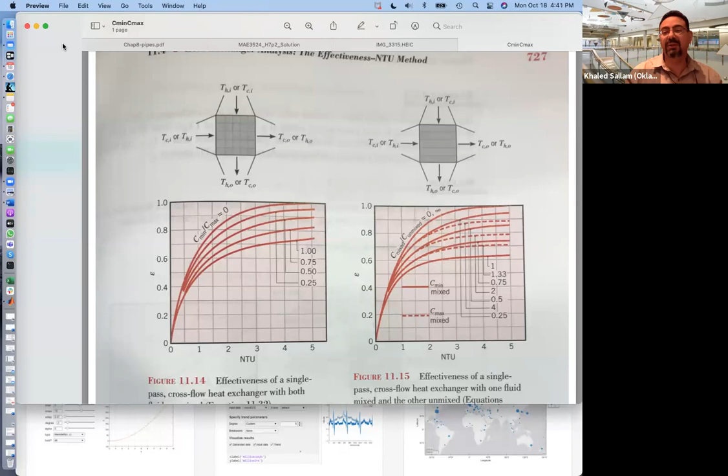All right. So now remember this last week.

Does anyone remember this graph? Yes. So what is this graph? Cross flow, like a radiator, right? Fluid is going this way in the pipes and the air is going normal to it. And I was confused last week about which one is the black solid line and which one is the dotted. Here in this one, there's no confusion because both fluids are this one in that cartoon.

Both fluids are unmixed. Both fluids go into pipes, baffles. They are not going as a bulk. It's not a stampede of fluid: let's all go, guys, get heated. No, everyone going into his own lane. Okay, but in this cartoon, they wanted to say that one fluid is unmixed, going into pipes, going into baffles, while the other fluid is just like, let's go. Everyone go in this big duct together.

And I was confused which line belonged to which. I told you we need to find a better chart where they actually have the key. This is the better chart which has the key. So what is the key? The solid one belongs to C minimum is the mixed, and the dotted one is C max is the mixed. Okay.

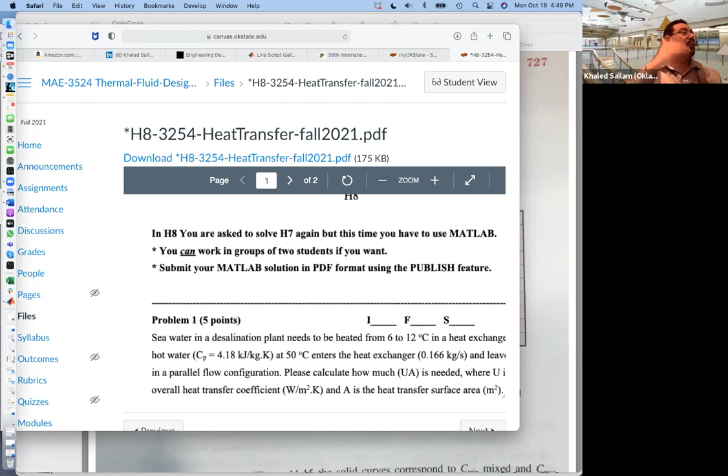And even if you think you know it all and you are the best student in this class, you still benefit from explaining what you think to other people. There's another level of knowledge you get when you try to communicate downwards, right? Because the other person will ask you a question and you need to reiterate your thoughts, like, yeah, why is that? And so again, I would strongly encourage you, but I'm not going to force you. So people online, you can also chat and try to prepare yourselves with each other, right?

And so how are we going to do this in MATLAB? So same 2 problems exactly, right? And in the second problem, he asked us to use the effectiveness method. So fortunately, the MATLAB file that's available for us actually uses the effectiveness method. So there are those 2 guys, and we're gonna talk about them. And here is a homework from 2 years ago that actually specifically uses this. So that would be a really good example for us.

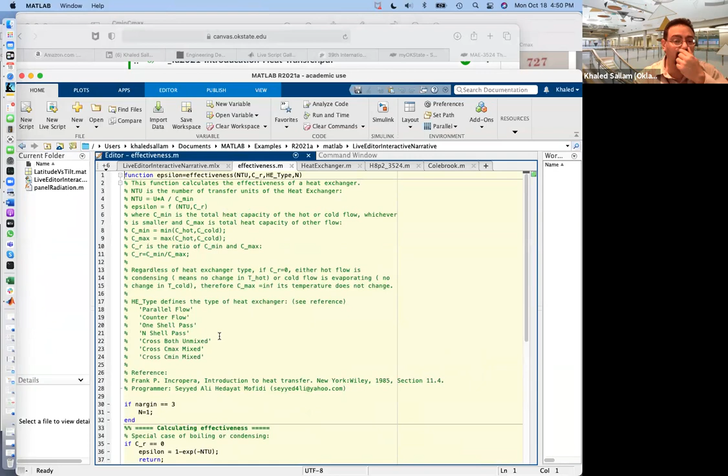So here is the homework. This is homework 8 2 years ago, not our homework this week. And here is a solution for it. So what are those two files? There is this effectiveness thing here. Let me open it. It's too small, I guess, to see. But basically, I got this from File Exchange on the MATLAB webpage, right? You know, on the MATLAB site, there's a lot of code available.

Who has been to File Exchange? All right, only one person? It's really a very cool place. All you need is a MATLAB account, which I think is free. So if I just say MATLAB Exchange, you can look for application and discipline. You can go to engineering, and under engineering, you'll probably find XSteam and stuff, and you can search for things. Modeling of Rankine cycle using XSteam. Here's XSteam, thermodynamic properties of water and steam. Anyway,

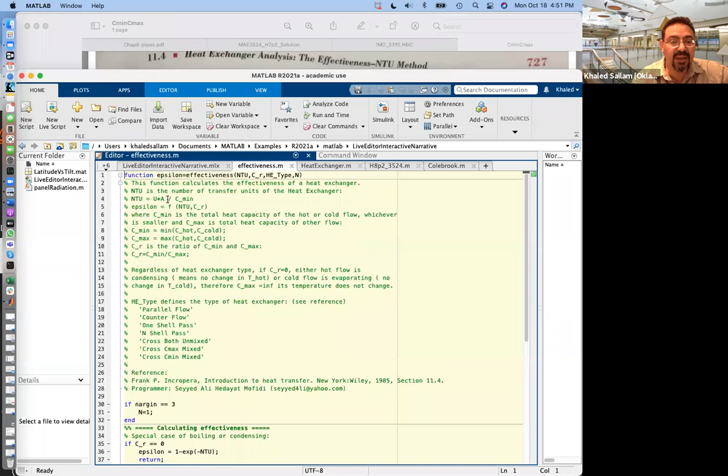I was talking about what is this? So this code, effectiveness, if you read it, says number of transfer units, UA over Cmin, and basically you go in with the number of transfer units and the CR and the heat exchanger type and the number of passes. Did you tell me parallel flow? And then it calculates what? The effectiveness, epsilon. It just calculates epsilon.

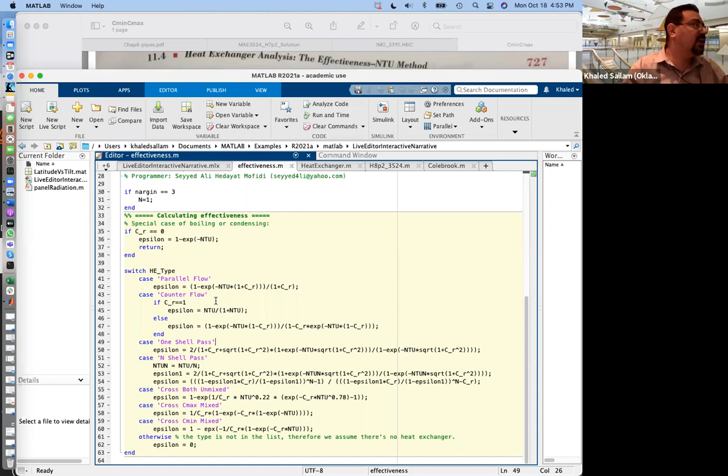So that function is basically the table of equations that we saw in the lecture notes. Remember, for each case, there is an equation between epsilon, the effectiveness, and NTU, number of transfer units, which is UA over Cmin, and the ratio, C minimum over C max, right? They call it CR. Remember the joke last week, how everything is C, from cp to capital C to the ratio CR. So this just calculates the effectiveness for you.

The heat exchanger one is set up such that when you call this, what do we need from the effectiveness method? Why do we use the effectiveness method? Because we don't know all the temperatures, and we really want to know the 2 exit temperatures. So we call the effectiveness method if we know the area and U, and the heat exchanger type.

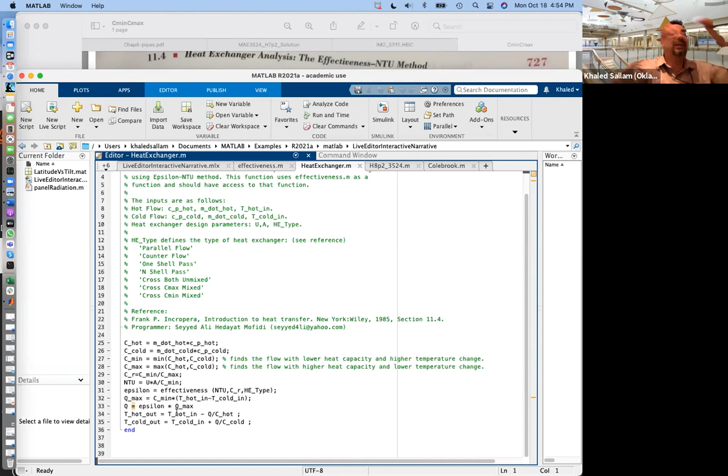We have a heat exchanger, and we are telling it we've got this hot fluid coming in, cold fluid coming in, and we want to know the results. How cold will the hot fluid be at the exit, and how hot will the cold fluid be at the exit? Basically, we need to figure out those two. So that's what this heat exchanger module will do.

At the end of the day, he calculates this: T hot out and T cold out. And how does he do this? That's easy. He basically looks for Cmin. He compares the two C's that you give him, the C hot and the C cold, and says which one is C minimum. Once he does this, he also calculates the ratio and the number of transfer units, UA over Cmin. And then he goes and calls the effectiveness module.

So you need those two, heat exchanger and the effectiveness method. He calculates the epsilon, and once he calculates the epsilon, he says, here's my Qmax, which is C minimum times the maximum delta T. What's the maximum delta T? T hot in minus T cold in, right? That's the maximum temperature difference. Multiplied by C minimum, this is the maximum Q you can ever imagine to transfer between the two.

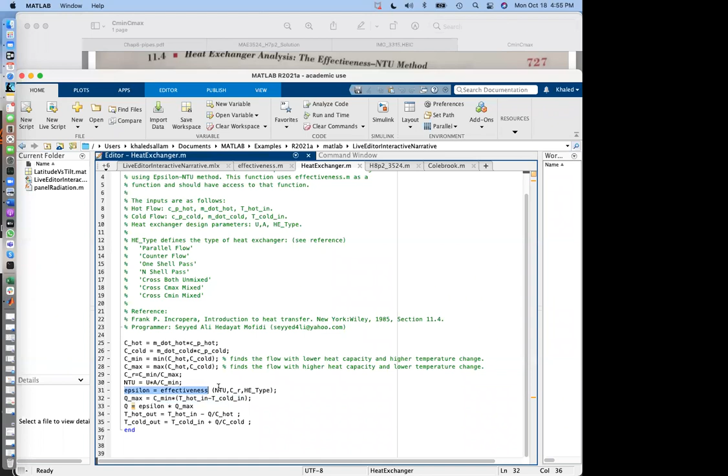Is that epsilon from the other file? Is that why we need both? So the epsilon in this file is from the effectiveness. So you need both. The effectiveness is basically working as a slave under the heat exchanger master function. So you definitely need the two functions sitting in the place where you're solving the problem. All right, that's what I was wondering. Right, they cannot work without each other.

Basically, the effectiveness is really where the calculation is done for the formula, and the heat exchanger function is the one that sets up the equation so that we can use effectiveness. Setting it up means give me my number of transfer units and tell me which one is minimum, so I can go ahead and use the formula. And so he calculates the Q actual from epsilon times Q max. Once I have my Q actual, I can calculate T hot out and T cold out.

So that is the appropriate way to use the effectiveness method. You use it when you have the area, the U, the M dot, and you're just wondering how hot the cold fluid will leave and how cold the hot fluid will leave. Now, not every problem is done that way. Some problems actually ask you for the area. Like our homework. Did it ask for the outlet temperatures, or for the area? It asked for the area.

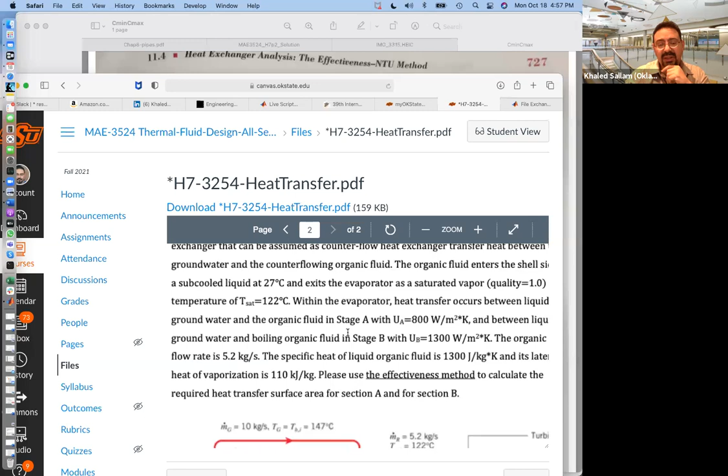So how could I solve it with the effectiveness method when it actually cannot start? This one is asking to calculate the required area. So how can I solve this where I don't have the area? In order for the method to start, you need to give me the area, but in this problem you're supposed to calculate it. So what happens then? And he said, use the effectiveness method. So what do I do? Calculate the exit temperatures for each side, and then you can use the effectiveness method.

Say that again slowly. If you calculate the exit temperatures... But I cannot calculate the exit temperature because I don't know the area. There is no area given here. And actually the temperature is given here. See how the cold fluid is coming in at 27 and leaving at 122? And the hot fluid is coming in at 147, but I can know its exit temperature, right? How? Q equals Q, and Q is M dot Cp delta T on each side. So I can calculate the temperature.

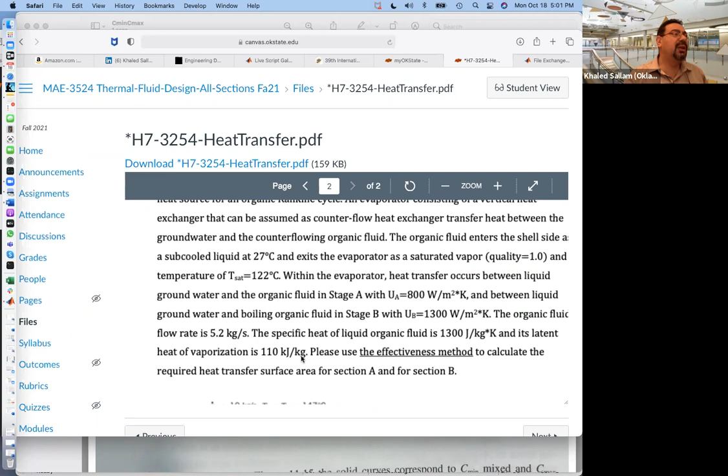So the question for people online is: that latent heat of vaporization, that 110 kilojoule per kilogram, is that my Q dot? See, there's two parts: one part without bubbles, just cold fluid becoming saturated, and then the second part is the saturated fluid bubbling until it becomes all vapor. And maybe even superheated, but it isn't, because he said X is 1, right? So the question is, can we think of this as Q dot?

And my question for you is, what is the unit of Q dot? Joule per second. This guy is joule per kilogram. To turn joule per kilogram to joule per second, I need kilogram per second. So you should think of this as Q dot per M dot. This is a small q, specific heat addition. So it's just waiting for M dot. So if you multiply this with that M dot, the 5.2, you got yourself your Q dot over here.

Yes? And if we have the Q dot that the cold fluid, not the water, the working fluid, the organic fluid takes to heat, this is also the Q dot this guy will take to cool. And what this allows you to get is the delta T here. You will be able to find this temperature in this part. And so now this is a separate heat exchanger. One fluid is constant temperature, the other is going from 147 down to whatever temperature you just calculated.

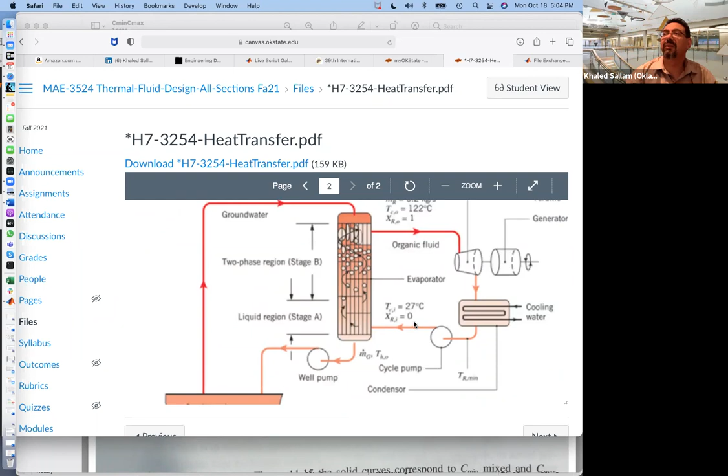Now in the second part, this is counterflow. The cold is going from 27 to T saturation, and the hot is going from that temperature all the way down to whatever it takes to go down. Yes?

Okay. By the way, what does organic fluid mean? It's not steam. They're those weird fluids at cold temperature ranges like this, not like 1000 and stuff. Because the vapor dome is really nice, and it allows you to have a dry turbine. What's a dry turbine? X is more than 1 at the exit. Dry turbine even without a superheater.

So remember how in one of the previous projects, when we took the pressure up, we ended up with a very wet turbine, and one of the requirements was to find out what's the minimum X that you allow in your turbine before all those droplets at the end of the turbine, before you go to the condenser, become really destructive.

If the quality of this guy is low, 0.7 and 0.6, you'll be shooting droplets tuck, tuck, tuck on the plates of the turbine, and that will destroy the turbine, right? So those organic fluids with this small temperature range will be dry because of the way their dome is sitting, basically. Okay. Anyway.

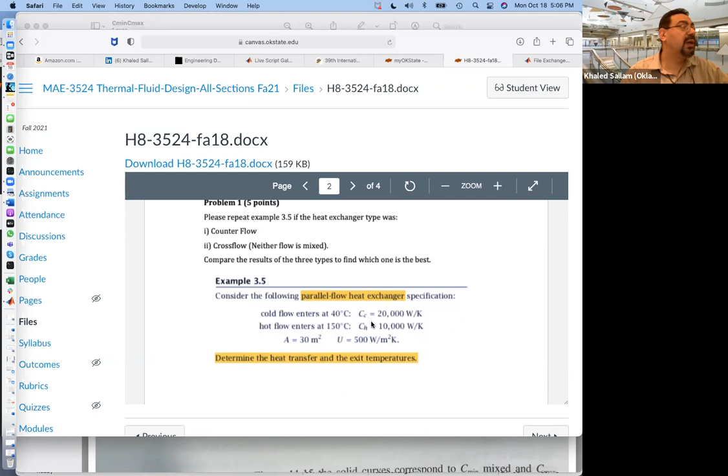Okay, so this problem is perfect for the effectiveness method. Why? Because I got the U, I got the area, I got the heat exchanger, and I have the temperatures in and the temperatures in. Okay, and this capital C, what is this capital C?

That's the m dot Cp, and I could tell because of the units also. Even if someone gives it to you in small font and you're like, is that specific heat or the heat capacity? The unit will give it to you because it's watt per Kelvin. Remember, Q is m dot Cp delta T. So Q dot over delta T is m dot Cp. So m dot Cp must be watt over Kelvin. So when it's watt over Kelvin, that's basically m dot Cp.

So that would be perfect for that program, right? And so those are the results. You can practice with that code, and you should produce basically those numbers. TC out, cold, I think I made a mistake. It should say T hot, sorry, no mistake. It's T hot out and TC out. And C stands for degree centigrade. So you see for parallel, counter, cross flow, and the Q in each case.

And not surprisingly, which one is the best out of those three? Counterflow. Look at the counter, it has 760 compared to 730 compared to 650. That's what you do when you do parallel flow. It's horrible. You're shooting yourself in the foot, basically. Because you put the two fluids against each other and they limit each other's potential to go down and go up. So you are submerging your own fluids by sending them into parallel flow.

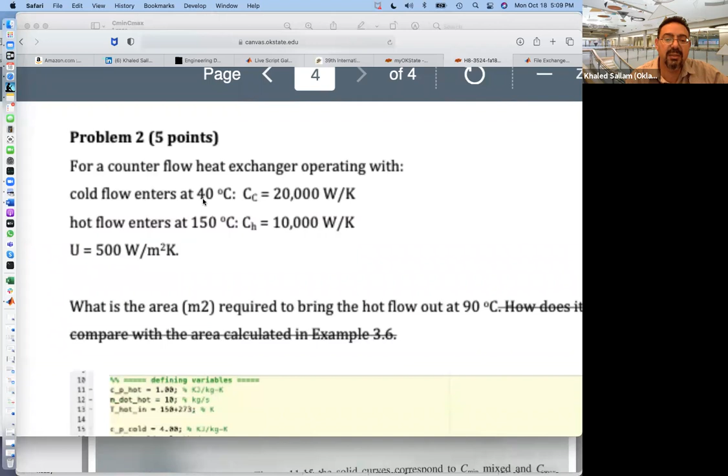Okay. Now the second problem: for a counterflow heat exchanger operating with this temperature and these C's, what is the area in m squared required to bring the hot fluid to 90 degrees? So that is the one problem, similar to our homework, where he's asking for the area. And the heat exchanger function is not set to calculate area. It's set to calculate temperature out. So you assume the area, calculate the temperature, ask yourself, is that the right one or no? And then you go back and forth. And so those are the answers.

And the code that does all this, one example here, homework 8.2.m. If we open it here, you will see how it is working. So I'm feeding him what he wants: Cp hot, m dot hot, T hot in, Cp cold, m dot cold, T cold in, and the U and the area. And this is the part that will be the assumption. You assume this until it gets you the right temperature. And this is a call for the heat exchanger function. What is the number for m dot hot? It's basically this guy. So rather than writing this, we could have entered 10.

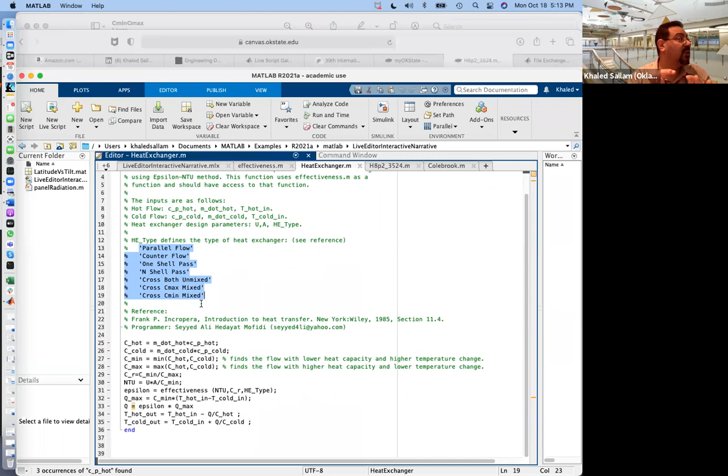So I just want to show you how, in this example, he is calling the heat exchanger. You need to give him those things in order: Cp hot, m dot hot, and you know that order from this example, or if you go to the function, the names are very clear. And the last one, HE type. He is telling you this is exactly the call. You cannot change the format. You have to stick to exactly that wording. See counterflow over here in purple? If it's capital C, you have to make capital C. Capital F, you have to make capital F.

Right. So I know you can call a function in MATLAB. That's not really that hard. But for those who have been hesitant to use MATLAB, you need to take that step. I and the TAs would be very happy to help you if you are still having problems. But I really wish that everyone leaves this course with the ability to easily use a MATLAB code that we can get from File Exchange at least. You don't have to be a good programmer until you get to your 3403, right?

3403 computer methods. That's when you'll really become good. But at least for now, what you need to be able to do is, if someone gives you a MATLAB file, you can run it. And by run it, you just need to know where the input numbers are, and how you can set everything under one directory, keep all the functions, and basically let them call each other. Like this example is going to call heat exchanger, and heat exchanger is calling effectiveness.

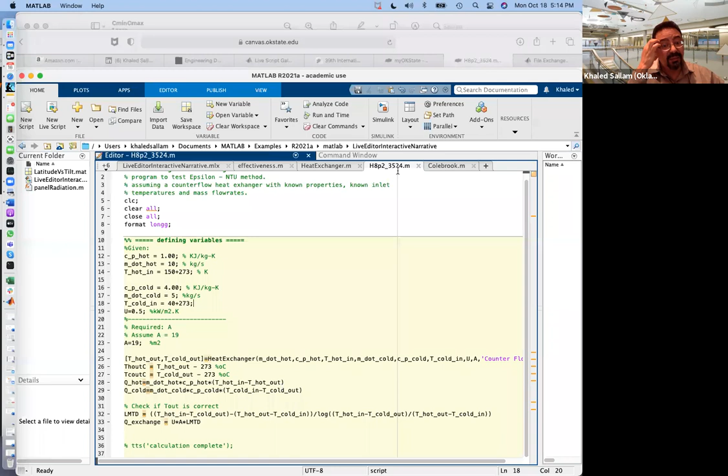Okay. So when you make that call, what will come out? This will come out. The other side is what will come out, just like what we did with XSteam and what we did with the psychrometric chart. And those two numbers now, he is first turning them into degree C, and then he is calculating Q hot and Q cold. All right? Yeah.

So the reason why we are assuming the area is because that heat exchanger code will not run without an area. He requires the area and the U as an input, and he produces the temperature as an output. So in order to use it, we really have to work in his own language. Can I solve the problem using the effectiveness method without this assumption? Well, if we have the chart, we can. How do we do that?

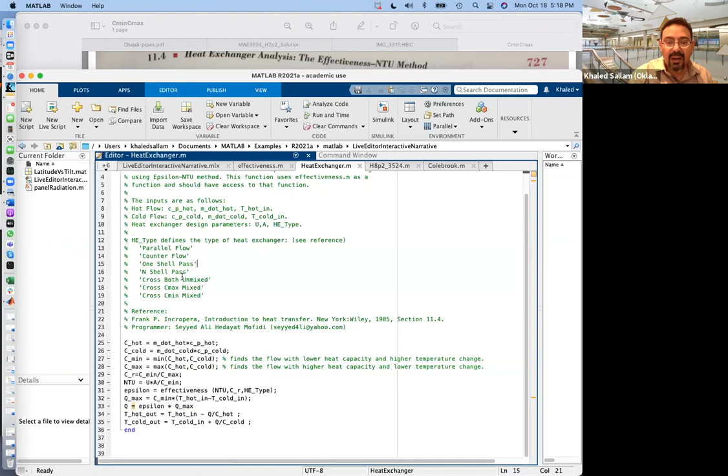I found that code but couldn't get it to work due to the type error. Yes, so the type error, again, if I were you, first of all, I would let this code run. This example one, make it run first, and it should run. And then after that, you just modify this by copying it. You just copy and paste. You don't even type. Control C, put it here, and it will work. Right?

Here's a funny and sad story about MATLAB. The first time I used MATLAB, for maybe 2 weeks I couldn't make the program run. And it turned out it was the file name. I like to put a dash and a version, or a dash and the date, in my file name, so I know when it was written. And it turned out MATLAB doesn't accept dashes in the file name. It has to be underscore. For 2 weeks I'm like, what's going on? So it's really very picky when it comes to names and formatting.

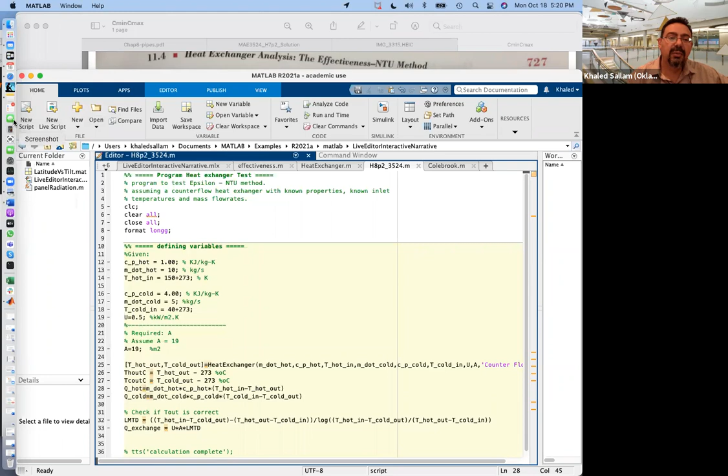All right. So, does this make sense? Yes. So you guys can run this file just to make sure it works. And then for homework 8, you will do homework 7 again, and homework 7 is basically 2 problems, right? You'll be able to do this, and that will be easy, hopefully. Questions?

All right. Let me tell you that to prepare for the midterm, there are all those problems. How many problems are in here in chapter 3 of that book? Let's go till the end. How many? 44? 44 problems, right? So these are 44 solved problems that you can practice on. All right?

The book and its solution is basically here. Download the heat transfer book and solve the exam. Okay, those are the 2 links. So download this and don't look at the solution immediately. Try to solve the problem. Give yourself a chance to get in pain a little bit, like 5 minutes of pain before you jump to the solution. Force yourself, like, no, I need to get it myself. All right? Good.

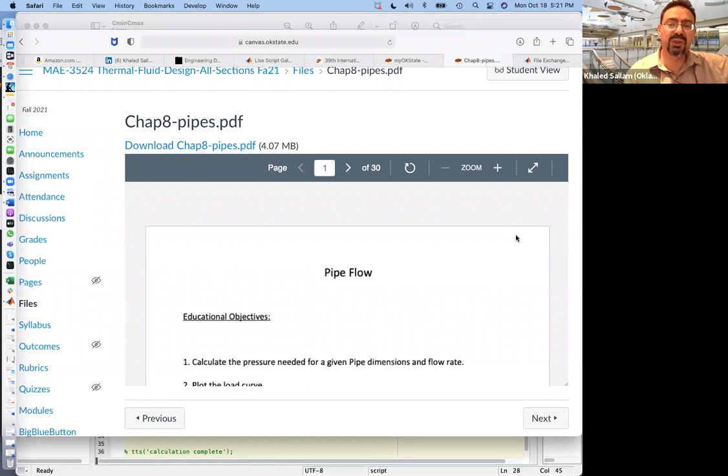Right. So the next part of the course is the fluid part. And here is what I'm hoping we can achieve from this part: calculate the pressure needed for a given pipe dimension and flow rate.

I'm sorry, sir. So on the exam, did you say it's November 1st or a week from today? So the exam is not next week. The exam is November 1st. Okay. So we have one more class and then the exam. And it should be under the syllabus, right? Okay, I was just making sure. Thank you. Yeah, we didn't change the date. Whatever is on the syllabus still works. Which is next week? No. 2 weeks from today.

Really? Let me double check. Here is my syllabus. No, that's not my syllabus. This is my syllabus. It says exam 2 is November 1st, and today is October 18, sorry. So you have one more class next week, and then the exam. Yes?

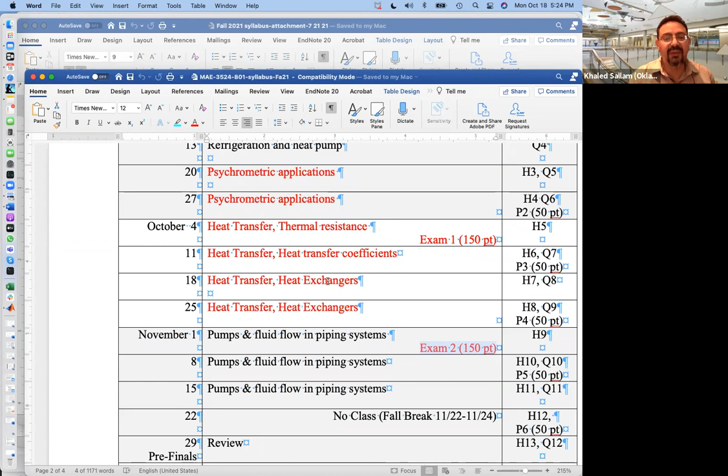It's over the stuff in red. So it's the psychrometric application, all the psychrometric charts, right? What's the temperature of the supply air, what's the temperature of the air leaving the cooling coil, latent load and sensible load, all the stuff about the psychrometric chart and HVAC, and then the heat transfer. All right?

Again, so the question is, are you going to post the solution for the second midterm? Yes. And when are you going to post it? I'm going to post it just the Sunday before that. Why? Because I just don't want you to read it. There are so many solutions everywhere, but I just want you to really experience the time crunch, because that is really a problem, like how quickly you should solve the problems. Can you do it if you promise to solve it on Friday? You promise? Okay, then I'll post it on Saturday. All right.

So now in this last part of the course, our goal is to be able to calculate pressure drop in a pipe. If you have this flow rate and you want to deliver it from Stillwater to Tulsa, a water pipeline or natural gas pipeline, and they ask you how large is the compressor that drives this natural gas, or how large is this pump, you should be able to calculate the pressure drop. You should be able to plot something called the load curve.

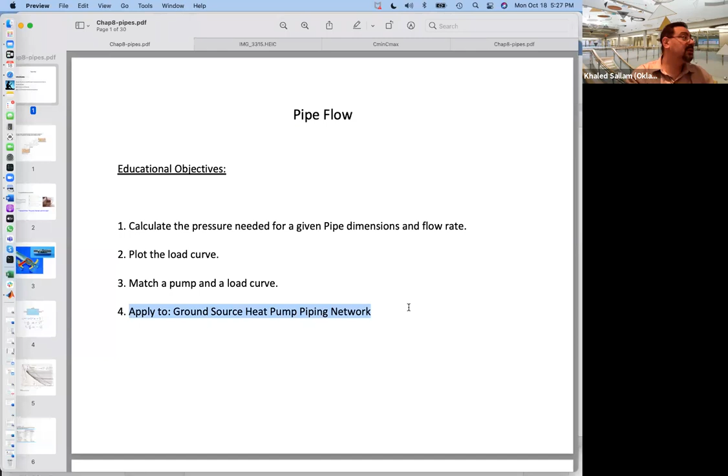It's a network of pipes that go into the ground, because the ground is more favorable for heat transfer than the air, because it's warmer in the winter and it's colder in the summer. So who wouldn't need that, right? That's pretty good. That helps our heat pump to have a smaller delta T on it, which makes the COP go higher. Okay, so that is the plan.

And you know, this part, you probably have seen it in which course, how to calculate the pressure? Fluid mechanics. You probably have seen it and you probably remember it too, so it will be a good review, right? It's not going to be that hard. So how much horsepower does the pump need to deliver the Q from one place to the other? Sometimes they ask for the horsepower, sometimes they basically say what is the head of the pump. And the head is usually in feet of water.

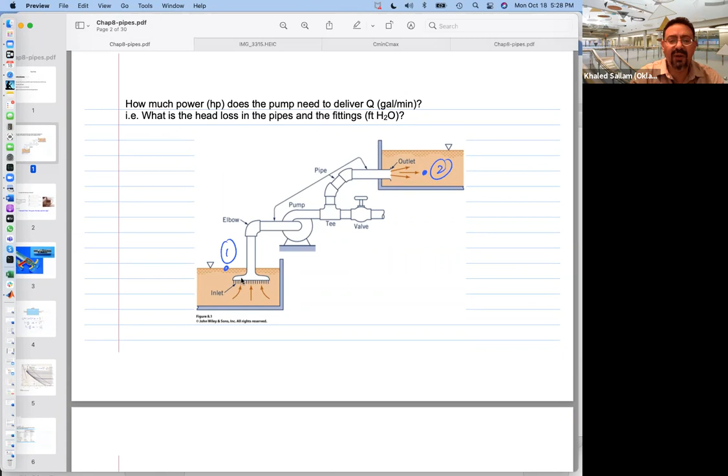So why does the pump have to work to deliver that? Because every one of those things has pressure drop over it. The inlet with all those strainers has pressure drop. The elbow has pressure drop. The tee has pressure drop. And of course, straight pipe has pressure drop. And that flow rate, that kinetic energy here, is energy that the pump needs to work for, right?

And you would think maybe that kinetic energy is useful. No, it's not, because all that kinetic energy, what will happen to it in the tank? It will dissipate and become heat. All that exit flow rate is total loss. You wish you would just slowly push it, because if you are sending it at a very large V squared over 2, big kinetic energy, you are paying for it.

Okay. So the losses in these pipes and the elbows and the valve, the major loss, which is straight pipe, and the minor loss, they all basically depend on: is the flow laminar or is the flow turbulent? Okay. And the guy who first came up with this experiment was Reynolds. And the experiment was like this, pipes with a dye.

And in the spring, hopefully we'll offer experimental fluids 4273. We do this experiment where we have a big channel, and we put the dye, food color, in the pipe, and you can really see when the flow is small, the dye just leaves nicely. But if you increase the velocity, or increase the diameter, or decrease the viscosity, use a very light viscous fluid, you will actually see the dye doing this. The reason is that the flow is unstable. Any small fluctuation gets amplified and you see the dye basically spread.

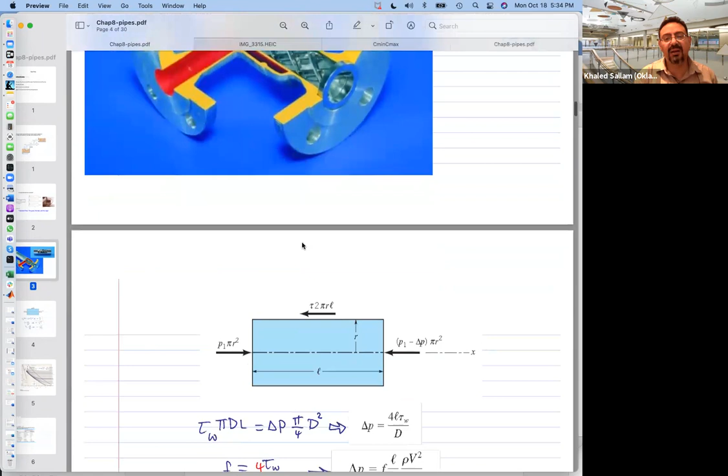So the point behind this is that you shouldn't always think in your design, let's make it laminar so that we wouldn't pay the pressure drop. No, you want to pay the pressure drop if there's another objective in your head, right? So you may be willing to actually have extra turbulence. So the pressure drop can be calculated like this or like this. And I really think this equation here is probably the most important thing that you need to have in your head from fluid mechanics before you leave college.

Just like in heat transfer, the one equation you need to remember from the heat transfer course is what? Q dot is UA delta T, and delta T is the logarithmic mean temperature difference. That is the equation of heat transfer. I would say in fluid mechanics, at least at the undergraduate level, that is the equation to remember: the pressure drop in a pipe is f L over D, half rho V squared. Half rho V squared is called, what's the name for it? It's called dynamic, so close. It's called dynamic pressure, but it's not head yet.

When you turn it like this, what happened here? He just divided the pressure drop in a pipe over rho g. So the head loss is the frictional pressure drop divided by rho g. So when you divide this over rho g, the rho disappears and the g shows up. So now this is exactly this, except for the unit. What's the unit of this guy? Pressure. It has to be pressure. Delta P is this. This is Pascal.

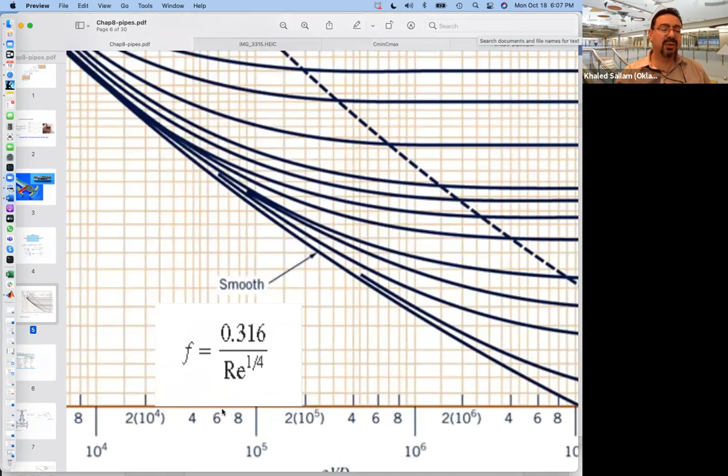This particular curve, the last one, is for a smooth pipe. So PVC pipe, glass pipe, things that are super smooth, we just use this formula, right? 0.316 over Reynolds to the power 1/4, and this formula is called the Blasius formula.

So in my graduate course, I teach multi-phase flow this semester for graduate students. So we also calculate pressure drop, but guess what pressure drop they are calculating? They are calculating it for bubbly flow, for example, or slug flow. So they calculate it for two-phase flow, which makes it a little bit more complicated. So the pipe is not just water, but it's crude oil and natural gas together. What's the pressure drop? But in our undergraduate course over here, let's stick to single phase flow, right? Just one fluid going into the pipe.

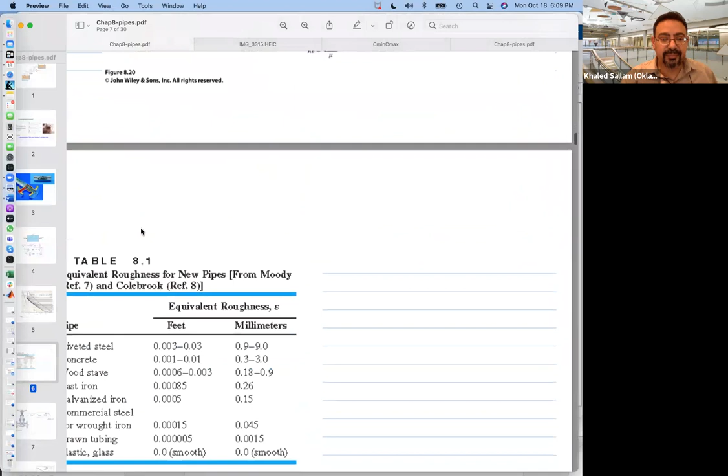And this is the table for the epsilon in feet and in millimeters, depending on the material and the manufacturing technique, because even if it's the same material, the way that you made the material can make the roughness different. Okay. You can see how the plastic or glass epsilon is basically 0. So that is the lowest curve, the smoothest curve at the end. And that's why this formula does not have epsilon over D. It's just a function of the Reynolds number, because the epsilon over D is 0, right?

Okay, so this is what we're gonna do for a big long pipe. F L over D, V squared over 2g, and we get the F from this chart. Now, what about all those valves and elbows and bends? We call those minor losses, because compared to the long pipe, the major loss will be 10 meters, and then you have 1 meter of minor loss, for example. But in some networks, the minor loss could really not be minor anymore. It could actually be more than the major loss.

Think about sprinklers. Look at all those sprinklers on top of our heads, and now imagine how many elbows they have compared to the straight pipe. And the pressure drop in the sprinkler itself. So in that network, the minor loss could be really significant compared to the major loss.

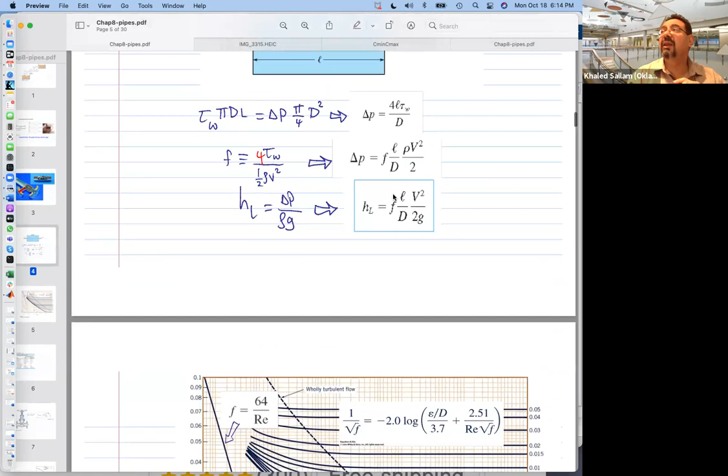So that K can be a really powerful tool, right? And sometimes for those fittings, rather than giving you K, they give you what? They give you lengths. So they will tell you that valve, being half open or quarter open or 3/4 open, will be as if you extended the pipe coming toward it by 2 meters, for example. That is its equivalent length.

And if that is the case, you just tell yourself, my pipe is 10 meters. Let's add 1 or 2 more meters because of that valve, and 1 more meter because of the elbow. So all the fittings can be either a K or an equivalent length, and you just add them to the pipe, treat them as a pipe, and say, here's my f for all those pipes, the original pipe and the extension, all right?

And in this part, I'm saying which V, because sometimes you are wondering which V. Is it V inlet or V outlet? If he gave me K for that sudden contraction, K equal 0.7 or 2, should I multiply by V1 or V2? The velocity before or the velocity after? Which one? The answer is follow the recipe.

The table that this K came from will tell you. This is not about guessing. It's not about physics. This is about the way they made this chart. So if you're going to use their K value, you better use the recipe, right? You could find another chart that's based on the other V, and it's totally correct. But of course, the K number will be different because it's based on a different velocity.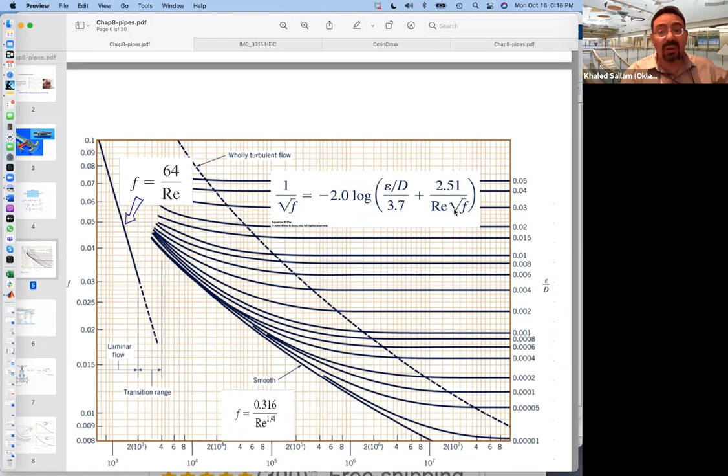Charlie said, when we were asking why the Reynolds number wouldn't matter, that when this goes to infinity, it will drop out. See, this is also a way for you to check if this formula is correct. You can see what happens at the extreme case. The Reynolds number becomes so big that term goes to 0, and f will just be a function of epsilon over D, which is actually happening. Right? So then, yes, this formula is correct.

So you can learn a lot by just taking everything to the extreme case, kind of like best case scenario and worst case scenario, and see if it makes sense or not. Okay. For example, look at here. This is the sudden expansion. Again, it's a function of velocity. Which one? Listen to the recipe. So here he is using V1, then we use V1. Here he used V2. Let's use V2. Right?

So I could understand easily why if you have sudden contraction, you have a pressure drop. Because, I mean, you are annoying me, you're giving me smaller area. Yeah, I'm gonna drop my pressure. It goes through this tiny hole. But why does going to sudden expansion also have a pressure drop? Why is that? You're giving me a break. You're moving me from a small house to a big house, and still I will feel annoyed and I have to pay out of my pump. Can you explain why there's a pressure drop when you go from small pipe to bigger pipe?

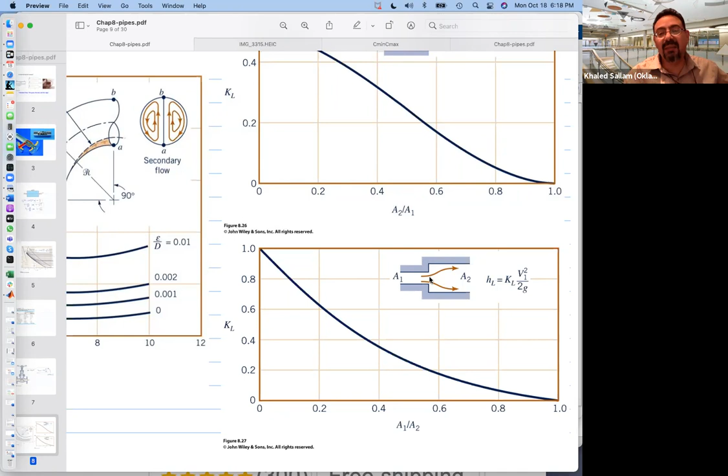You have what? Yes, exactly right. What's your name? Steve is saying, because look at this corner. What happened at that corner? Can we imagine? It must be a circulation. Let's not call it turbulent. Even if this is nice and laminar, there will be a circulation bubble. There will be a place where the fluid is rotating. And if things are rotating, it costs joules. And who's paying for those joules? The pressure drop that will happen. Okay.

So this is actually really nice. Although Bernoulli will tell you that you go from high velocity to small velocity, why is the velocity here smaller? Because the area is bigger, and because AV equals AV: area 1 times V1 equals area 2 times V2. Yes, the velocity will drop. And the pressure P1 will actually go to a higher P2, but not as high as it should be. How high should it be?

Bernoulli will tell you P1 plus half rho V1 squared should be equal to P2 plus half rho V2 squared. You drop my V2 by 2, then V2 squared will drop by 4, and I'm expecting my pressure to recover this much. The pressure will recover, yes, definitely P2 is bigger than P1, but you will not go to the ideal. You will go a little bit smaller than the ideal. Why? That is KL half rho V1 squared. That part that you lost is because of this circulation bubble here and circulation bubble over here.

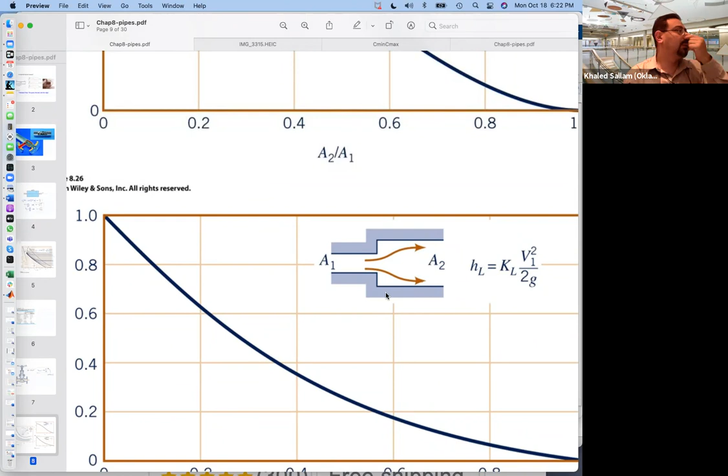Okay, so sudden expansion visualization. Maybe video. No. I don't see the video, but maybe images. Yeah, so you can see the streamlines. You can see also over here how the flows are going straight and there are all those circulations. Right?

See how they're trying to minimize this by taking the flow, rather than sudden expansion, into guided expansion. That's why people in the HVAC industry, whenever they want to go from small duct to big duct, spend the money and the effort to go with a cone, because they know they're going to pay for that circulation bubble for the rest of the project. As long as this duct is there, that circulation bubble will keep running, and that blower will keep paying for it. So it's this guy that we are paying for, and eliminating it is really a good deal.

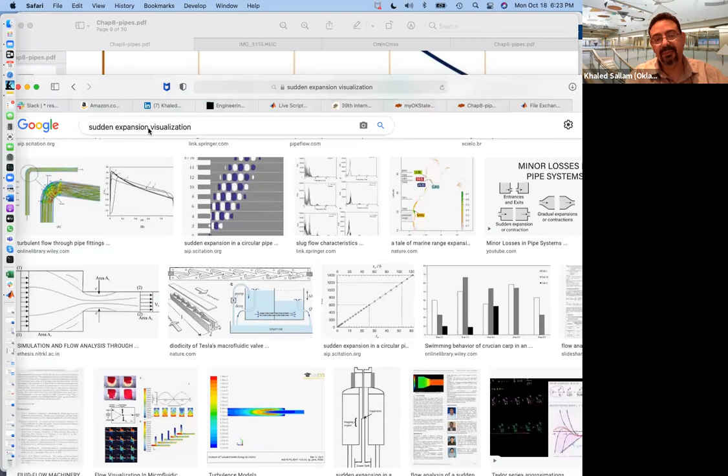All right. Even the elbow is the same idea. When you have an elbow like this, you think that's guided flow, why is there energy loss? But you don't see that the flow will separate, and that separation depends on the radius of curvature. So there is a loss coefficient K that's a function of, are you turning 90 degrees on me, or are you taking it slower so that I can help the turning? And in big corners, they can reduce the pressure drop a lot by having guide vanes inside, so the flow wouldn't separate and they can take it slowly and guided.

So there are tables and charts for all those minor losses. You can find something like this. And some are more complicated than others.

And you just assemble all those K, and then the minor loss becomes sigma K L V squared over 2g, right? And you add all those K. And this is the one that I was telling you about when they try to go from one section to the other, even say from round to rectangle, you have to slowly do that transition so that the flow does not really make you pay for all the separation and circulation.

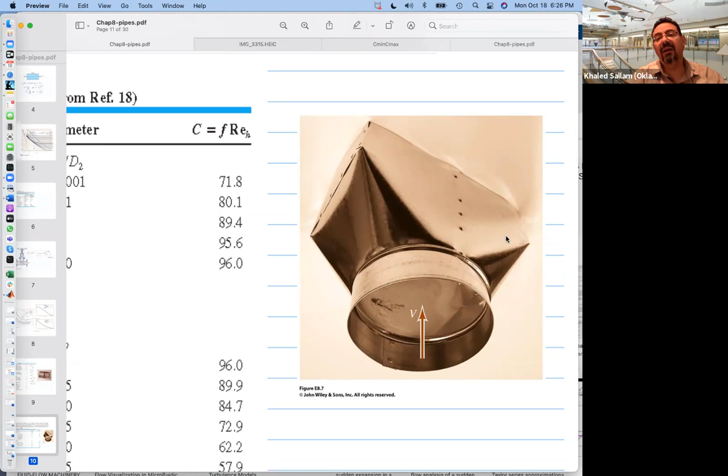So what if I have a rectangular duct? How do I get my Reynolds number? How could I get my epsilon over D? And this will introduce the concept of hydraulic diameter. So that is really, really good. And it really worked. And I tried this myself, actually, even in my PhD, for really weird configurations.

We wanted to calculate things for an annular flow. What's annular flow? Flow between a big pipe and a small pipe. Even for this, the concept of hydraulic diameter worked perfectly. So basically, the hydraulic diameter is a way to express all those weird cross-section areas with an equivalent diameter, because the Moody chart needs the diameter in the Reynolds number. The epsilon over D needs the diameter in the chart. So how do we come up with that diameter?

4 times the cross-section area. The cross-section area is easy. That's this guy times this guy, A times B. Even here it's easy. What is the cross-section area? Pi over 4 D squared minus pi over 4 d squared. Big area minus small area. Now that P is weird because out of all the symbols in the world, they picked P while we are calculating pressure drop. So you may think that's the pressure. No, it's not. It is the wetted perimeter.

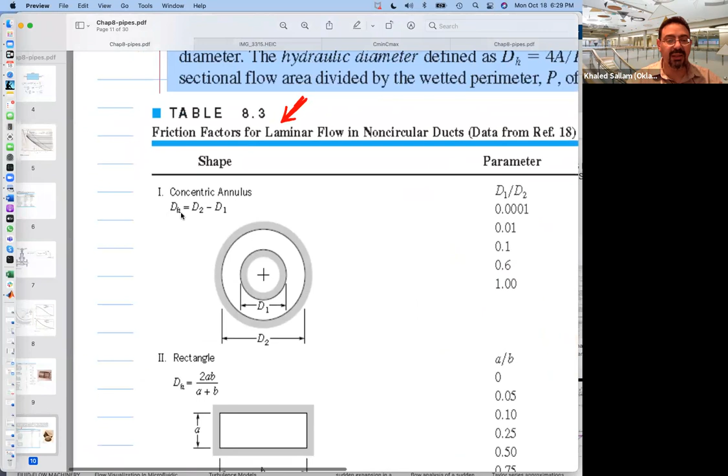The diameter is D2 minus D1. And for rectangular, it's 2AB over A plus B. If you don't believe them, just do 4 times the cross-section area over the wetted perimeter, and you will see it works. So that is the DH. And I can now go to the Moody chart and use that diameter, D minus d for annular flow and 2AB over A plus B for the rectangular duct. How about the velocity? Q over area. What area? The whole area, right?

By the way, did you know rho V is actually m dot per unit area? So if they give you the m dot, rather than calculating the velocity, you can just calculate m dot over the area, and that becomes rho V. So rho V is a kind of mass flux. It's kilograms per second per meter square.

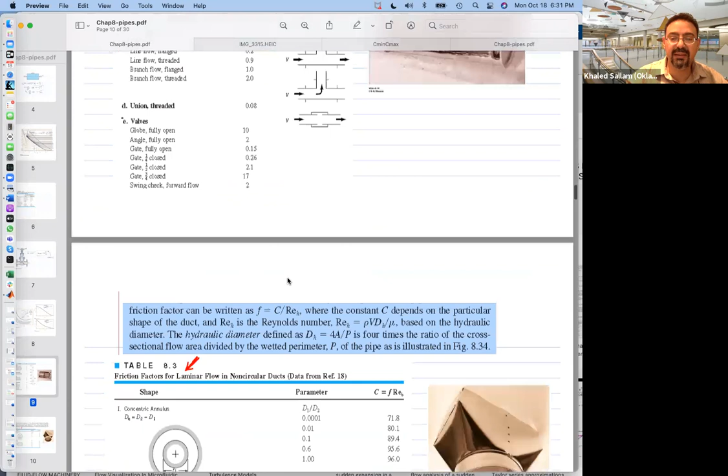So you don't have to calculate the velocity if he does not want you to calculate the velocity. All you need is the Reynolds number. And I will come over here and basically take the roughness from the material he's giving me over the diameter of the pipe, the hydraulic diameter of the duct, figure out which one I am, and just follow the curve to the right to the Reynolds number and read my F. Good.

Now, the only trick for those weird geometries is the laminar part. The laminar part should be 64 over the Reynolds for a pipe, right? If the flow is laminar, we just use 64 over the Reynolds, but not for those weird geometries. For all those weird geometries, we don't use 64 over the Reynolds. What should we use then? 71 over the Reynolds, 96 over the Reynolds, all those weird numbers, depending on the geometry. So they will give you the ratio, and based on it, you will use those numbers.

Okay? So for example, rectangular duct, if A is so small compared to B, so it's like a slit, the number becomes, you see, so high, 96. And only when that ratio starts to build into a square, you see it's basically getting smaller, right? So that equation for laminar flow tells you which number you should use for the laminar part.

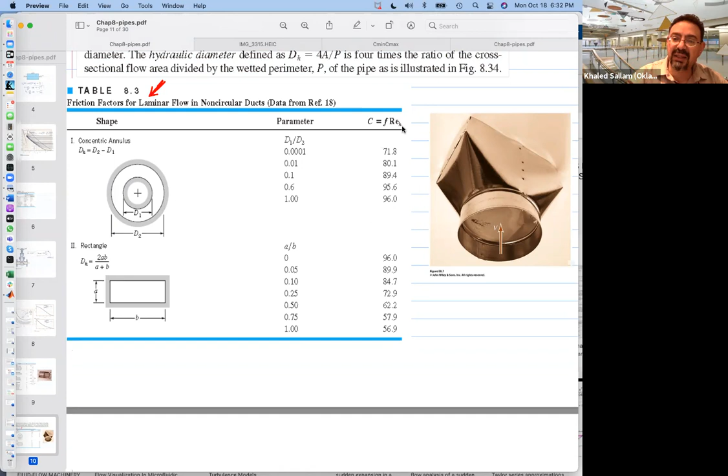That constant C is written as F multiplied by Reynolds, Reynolds H. What does H stand for? Hydraulic diameter. It's telling you that C is not 64. It's those numbers depending on the geometry. Does this make sense? Yeah.

Very good. So the problem in this is basically in pipe flow. Calculating the pressure for a pipe that you know and a flow rate that you know, that's easy. That's using the Moody chart and the formula: HL is f L over D, V squared over 2g. And that's basically type 1. Just calculate the pressure. Type 2 and type 3 are basically when he asks, I have this pipe and I have that pressure, what flow rate do I have?

Okay. And in our course, when we are designing the system, we don't have a pipe. We are trying to make a pipe, right? So we basically know a flow rate, and we know that the only pump that we have is this much, for example. This is the design consideration. In the market, we don't have anything bigger than this head. So what diameter should you use? It's the same formula. It's just what is given and what is required. If the required is pressure, easy. If the required is flow rate or diameter, a little bit tricky.

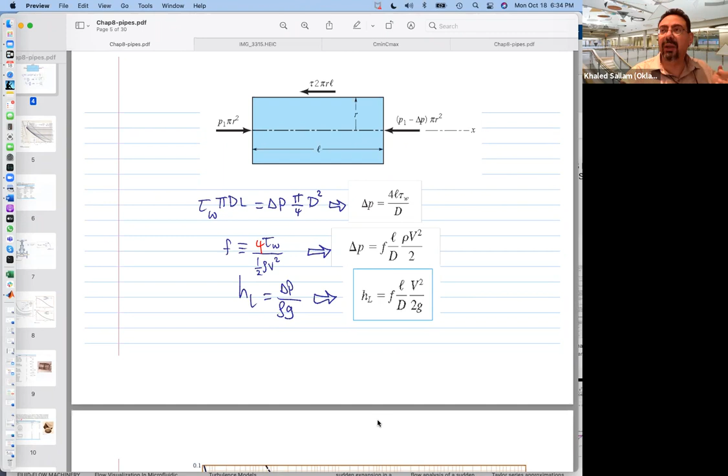No, I can't, because I don't know the F. Why don't I know the F? Because F is a function of the Reynolds, which is a function of the diameter, and F is also a function of the diameter through roughness. So that requires trial and error, because of the way the chart is set, right?

There are charts in the industry for engineers who basically don't have the time to iterate. So the charts are done in a way that gives you exactly what you want. I'm going to show you some of those, right? They basically give you what you want immediately without iterating. But a chart like this is only for water, for example, and only for a certain pipe material. They will tell you this is for stainless steel pipe schedule 40.

So when they take out the material, epsilon, or even take out the fluid, there is no rho over mu, because it's only for water. We know the rho, we know the mu. Then the chart becomes easy, and it just becomes, let's go find the answer, right? I'm going to show you those charts, and then in the next homework, I'm going to ask you to make one of those charts yourself so that you can see it's super easy to come up with a design handout for your company, right? Once you fix a bunch of parameters, the equation just becomes a simple relation between head and diameter.

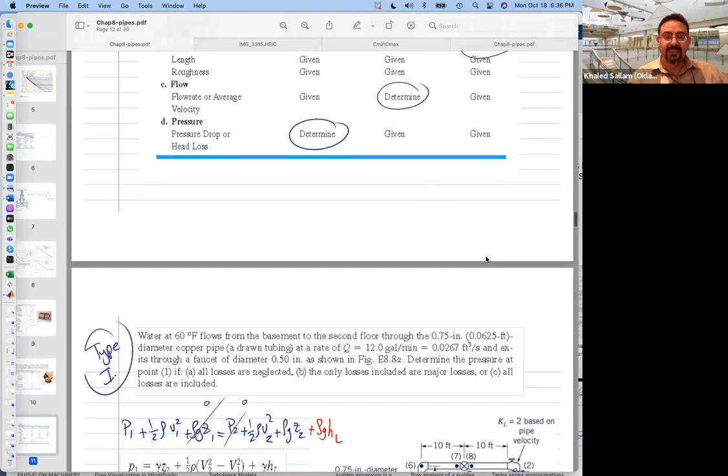So basically, it's just the iteration over the f. That's what makes type 2 and type 3 a big deal. Okay, so here's an example of type 1. You are given all the geometry, length, and the diameter somewhere here. Yeah, 0.75 inch. That's the diameter throughout.

And copper pipe, drawn tubing, so you can go to the material and find out what the epsilon is. And the flow rate is given. You know the flow rate and you know the area, then you know what? The velocity. Because Q is AV. Right? And we have basically all those elbows, 1, 2, 3, 4 elbows, and one wide open globe valve, which, even if it's wide open, will still have some loss.

And the faucet itself, which has a KL based on the exit velocity, right? And he said, determine the pressure at point 1. Basically, what pressure is needed to drive that flow rate? What pressure needs to be here so that you can deliver that flow? What's the pressure here at the exit, by the way? Anyone? 0. No, 0 gauge, correct.

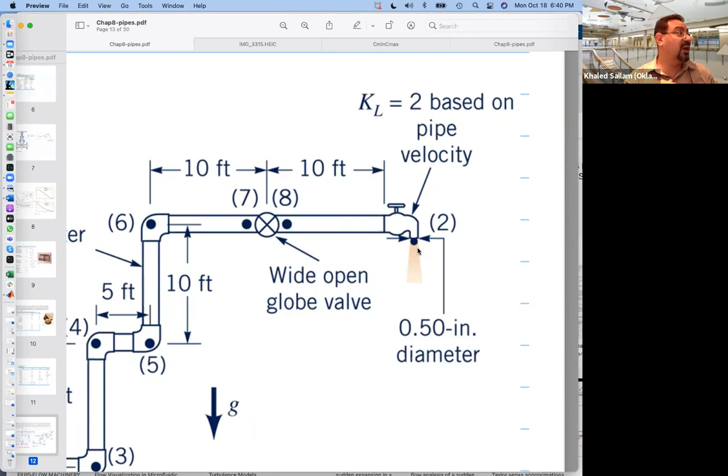If this was supersonic flow, a supersonic exit, so we are not talking about water coming from a faucet, but maybe a vent from the International Space Station, or a gas leak from a pressurized tank, and the flow is leaving at supersonic speed, the pressure at the exit could be higher or lower than P ambient. And of course, that's immediately at the exit. Once it leaves, the first millimeter it takes out, it will realize, what? Look at that pressure outside.

So supersonic flow leaves blind to the pressure. It has no idea what the pressure outside is. That's what it means to leave supersonic: you are moving faster than the pressure wave. So you are just rushing out, but the flow is around you. Once you step outside, the pressure around you will say, wait a minute, you are lower than our pressure. We are ambient, and you are maybe 0.5 P ambient, and they push on you. And that's why you would have, look up shock diamonds.

Is it because it's leaving so fast, it's pushing the air away? It's leaving so fast, it is blind. It cannot really sense the pressure. It does not know what's going on outside. So the flow on the outside says, you are lower than us, and they push on it. And the flow gets contracted, and they push so much they make it even higher than the ambient. And then it expands too much, and becomes less than the ambient, and then tuck, tuck, tuck, tuck.

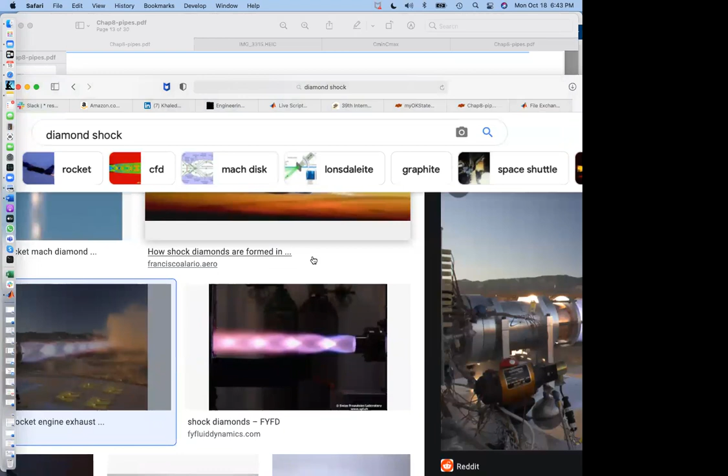You can see it nicely in the picture below, it fades away. Like it's a clear diamond, then it fades away. Say that again. The picture you're hovering over, you can see it. It looks like a nice crisp diamond and then fades into a fuzzy one. Yes.

And I saw that myself when I was a postdoc in the Air Force Supersonic Wind Tunnel. I was setting my optics and I wanted to align the laser with the wind tunnel. And so I told my technician, just blow some air for me so I can see where the jet is. And the air was supersonic and the laser was illuminating. And I saw those diamond shapes up close and they are so beautiful.

I mean, mine was so tiny too. The whole thing was 1 millimeter. So I had those tiny, cute 1 millimeter diamonds sitting above each other. But again, they just die in like 4 or 5. So this is if you are going supersonic.

What is the speed of sound at room temperature? 340 meters per second, right? 340 meters per second. There is no way this guy is going to be. And by the way, the speed of sound in air is different from water. Which one is higher? Water. The speed of sound of water is way higher. Talking about 1500 meters per second. So you need to be like 2000 or something to be supersonic in water.

All right? So as long as the flow is subsonic, less than the speed of sound, there is no way that pressure can be different from the ambient where he's coming out. Because the ambient will catch up immediately. He does not have the luxury to leave without looking behind. The pressure wave will travel in him and adjust him before he even leaves. So subsonic jets, which is most liquids, because it takes huge power to actually accelerate this. Even a gas jet, it takes a lot of power to make it supersonic, right?

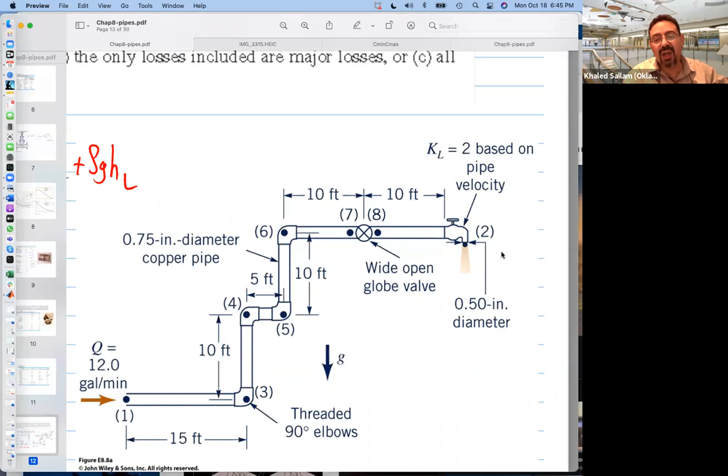Right? So end of the story. A subsonic jet will have to be ambient. It will have to adjust to the pressure outside. Only supersonic for a very short distance, and you see that shock train that adjusts him and gets him to be ambient within 5 or 6 diameters. Okay,

very good. So in order to calculate that pressure, or the difference, it's basically what? It's basically the friction pressure drop. It's fL over D, V squared over 2g, plus sigma K, all the Ks, right? So he said, now calculate if all the losses are neglected, if the only losses included are major loss, and then the last part is all losses included. So he wants you to repeat this when hL is 0, when hL is major, and the third one is when hL is major and minor.

Okay, so this is applying Bernoulli between 1 and 2. All right, so between 1 and 2, what do you get? You get the head that you are rising up to, right? So if the water is delivered here and you need to go up 20 feet because you are delivering to the 2nd floor, and you have to go through all this, then the pressure needs to pay not just for the friction rho g hL, but you're also paying for the static pressure, for the elevation, rho g delta Z, right? And notice that it does not matter where Z equals 0 is.

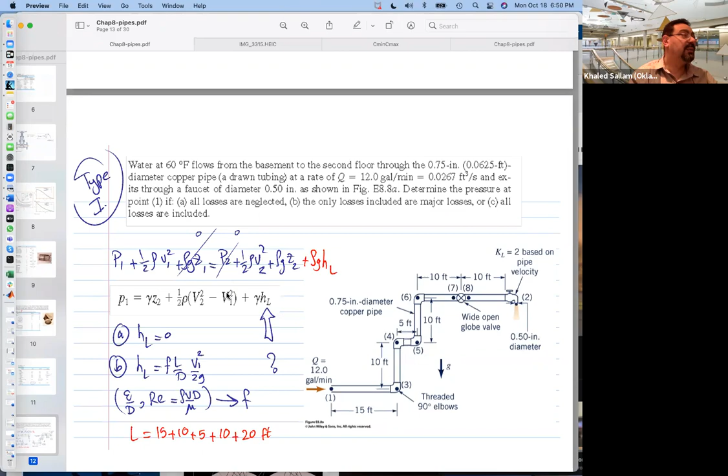So now, in this case, let's read this problem and calculate the pressure difference that it takes. Well, V1 here is almost 0. Why? Because the area is almost infinity. But area 2 is small and V2 will be big. So you have to pay for this, right?

So whenever you are pulling water from a big tank and delivering it at the exit into a pipe, you pay for that exit. This is called the exit velocity loss, or the exit loss. Imagine if this one is 0, then you are paying for all of the half rho V2 squared. So they will give you this with a K equal to 1. Basically, all the dynamic pressure is lost at the exit. K will be 1 here. Yes?

So you can see he basically put the velocity over here. It's the elevation plus half rho V2 squared minus V1 squared. And if V1 is 0, then you are losing all of this. And the major loss, he's getting from the Moody chart. It's important to calculate all the lengths. You can see there is 15 plus 10 plus 5 plus 10 plus 10 plus 10.

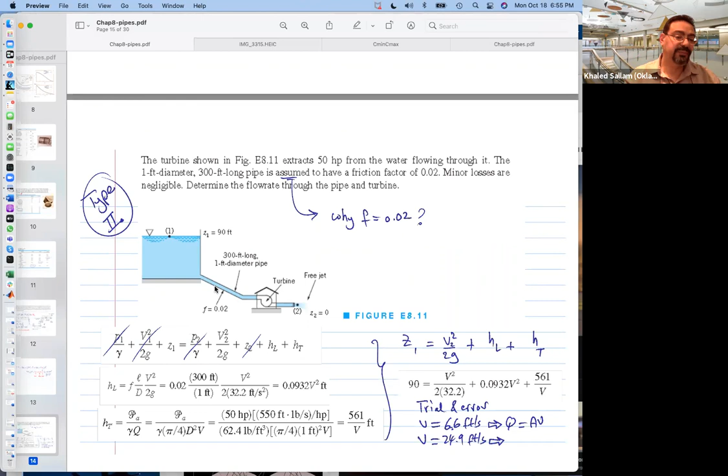If there was a pump sitting over here, then we will write H pump. It will be considered as part of the input. Energy available at the input plus the pump equal energy at the exit plus the turbine plus the loss.

Okay. The project 6 actually has this hydropower storage system. What is a hydropower storage system? I'm still writing it, but you can have a peek. Week review here, project 6.

And it's basically this, that you are taking water from a low reservoir. If you have a lot of energy and you don't know what to do with it because the wind turbine is running and people are sleeping, they are not using the electricity, and you have a pump that takes the electricity and takes the water up, sets it on the top. And then at night, you keep doing this and pump the water up.

And then in the morning, when people start running their coffee maker and turning on the light or even go to work and HVAC starts working, and the wind energy is not available or just the load is big, then the water flows the other way and this becomes a turbine. And the turbine basically gets energy and you benefit from the energy.

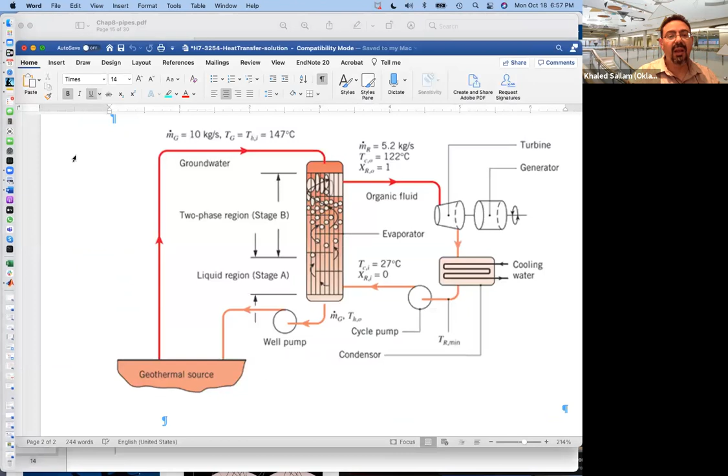So the way to design something like this or to run the calculation is basically similar to this, except that this is running in the turbine mode, and when we run in the pump mode up, this would be 0, and the pump would be here, right? And you will take it from here going the other way.

And of course, unfortunately, H loss is eating from you on the way down and on the way up. Whether the flow is driving a turbine or a pump is driving it, you lose H losses everywhere, back and forth. Okay? So what is important here is to remember that H turbine can be expressed in meter. H pump can be expressed in meter.

So that's not that easy because usually the pump or a turbine is also rated in kilowatt or megawatt. They are telling you, you are designing a 50 kilowatt or 2 megawatt pumping storage system. So how can you turn this power, whether in horsepower or megawatt or kilowatt, into meter? How?

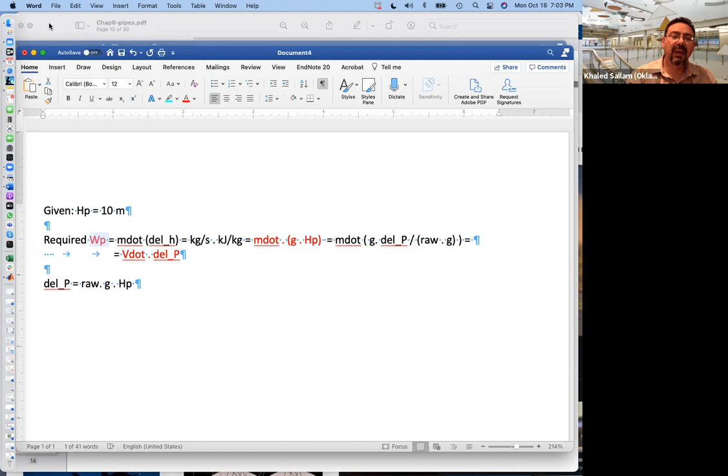Okay. So you can get the head from the power by basically saying that it's M dot GHP. And that's what you see over here. See, he got this weird pressure, it's not really pressure, it's the head. Sorry, it's a power. So this power, dividing it over, what is this gamma? Specific weight. What's specific weight? Rho G. So this is rho G flow rate Q.

So he's basically saying the rho G, or basically M dot GH, is the power. So you can get the H from power over M dot G.

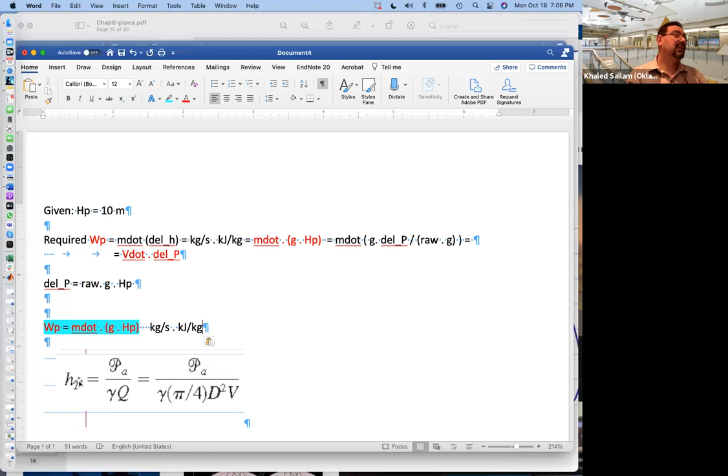So he can do this for the turbine and he can do this for the pump. You can turn the turbine into a head of 5 meters, or if someone tells you this pump has a 10-meter head and it delivered that flow rate, then you immediately know the horsepower. Yes. Okay. So I'm going to say that's valid for both turbines and pumps as well. Both of them work like this. Okay.

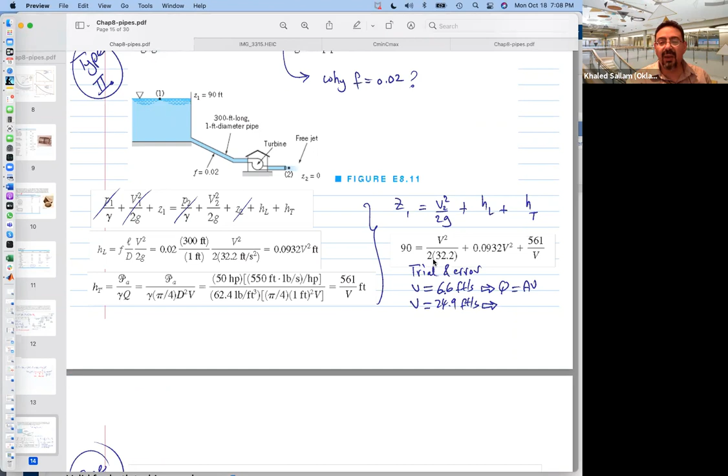And notice the exit, you see that exit, that V2 squared over 2G, it's here. It's basically part of the losses. In many places, when they count the losses, they would say, I have the pipe loss, FL over D V squared over 2G, plus 1. That's also a loss for me, right? So you consider that exit as part of the FL over D. It's a K. It's a K equal 1 for the exit flow.

Okay. All right. And so he iterated for one unknown here. He basically solved for V. But what would make this problem even more complicated, which is the case in our design project number 6, is that we are not going to assume F equal 0.02. Or not assume, but I mean, we don't know the F.

So on top of that iteration, there's another iteration that says, what F are you using? Is it correct? No, go back, fix it, come again, right? So when you calculate the velocity, you need to revisit that F and ask yourself, is it 0.02 or should I have used 0.01? You got it?

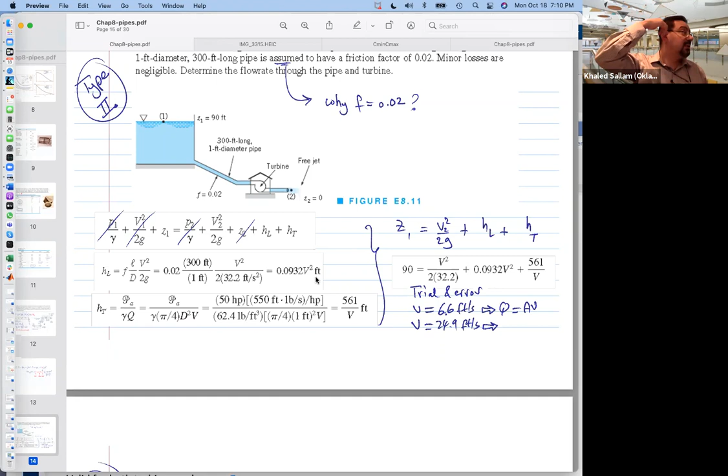So this problem is almost half of the sixth project. This is on the way down, and then you solve it again on the way up. Questions?

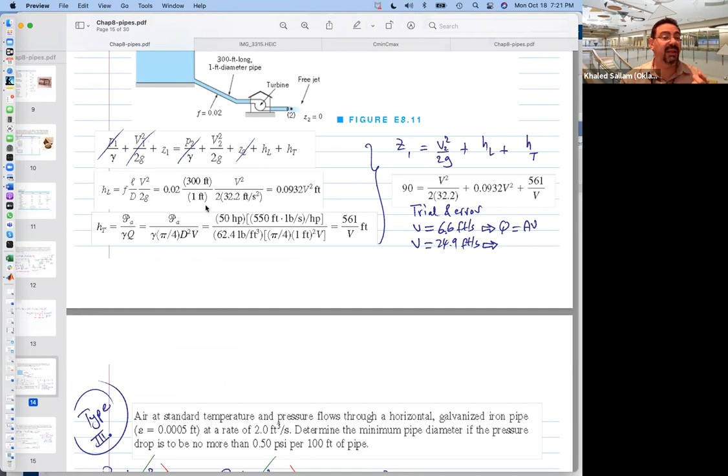So either way, whether you know the velocity or the flow rate or the diameter, type 2 or type 3, it's the same problem. What's the problem? I don't know the F because I don't know the V. The V will be unknown whether I don't know the diameter or I don't know the Q. Either case, I don't know the V. So the equation will end up looking the same.

Basically, see here he's writing the velocity as Q over D squared. So it's the same equation. And you have no idea what the f is. And also you have no idea what the velocity is, which is Q over D squared, right? So if you look here, you will basically have to assume and calculate. Eventually you find an equation between the diameter and the f, right?

And so he's basically saying assume the diameter. Once you assume the diameter, you calculate the f, and from the f solve the diameter and go back and forth until the number that you assume is the number that you calculate. All right? Question?

So the Bernoulli equation by itself is a piece of cake, right? Energy in: pressure plus half rho v squared plus rho g z equals energy out plus the losses. If there was a turbine in this pipeline, we would put it over here. If there was a pump, we would put the pump here. The pump is considered part of the energy in, and the turbine part of the energy out. It extracts energy from us, right? So just try to remember where you put the H turbine and where you put the H pump.

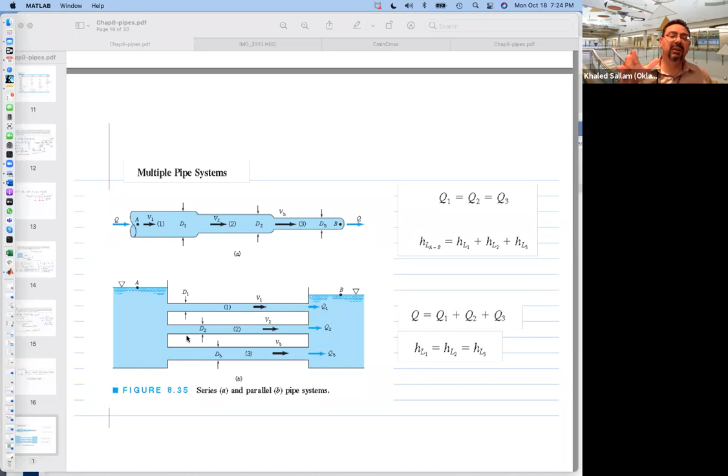If the flow is in series, that means one delivers to the other, right? And obviously the flow rate here is the same here, is the same here, because it has no other way to go. On a steady state basis, if there are 10 gallons per minute here, it has to be 10 gallons per minute here, and 10 gallons per minute here. And the pressure drop would be this plus this plus this.

That's easy too, right? If you have a line that goes from Tulsa to Stillwater, then to Oklahoma City, first you take the pressure drop from Tulsa to Stillwater, and then from Stillwater to Oklahoma City. You have to add. That's easy. So series is easy, I think. It's the parallel that's confusing, specifically the pressure drop in parallel. So what's parallel flow?

They all come from one place and they leave to the same place. They come from here, leave there. Okay, they have the same start and the same end. So if they all start from the same location and end up at the same location, what's the relation between their pressure drops? It has to be exactly the same. So if this pipe has 10 meters of pressure drop, this one will also have 10 meters, this one will also have 10 meters.

No matter what the diameter or the length is, even if this one goes a little longer before it comes here, if they start at the same place and finish at the same place, say the pressure here is 50 and the pressure over there is 20, then every one has a 30 difference across it, right? Does this make sense? This is the part you will not buy later on, like, why do they have the same pressure drop? And I'll tell you, they start from the same point and finish at the same point. Why wouldn't they have the same pressure drop? Okay.

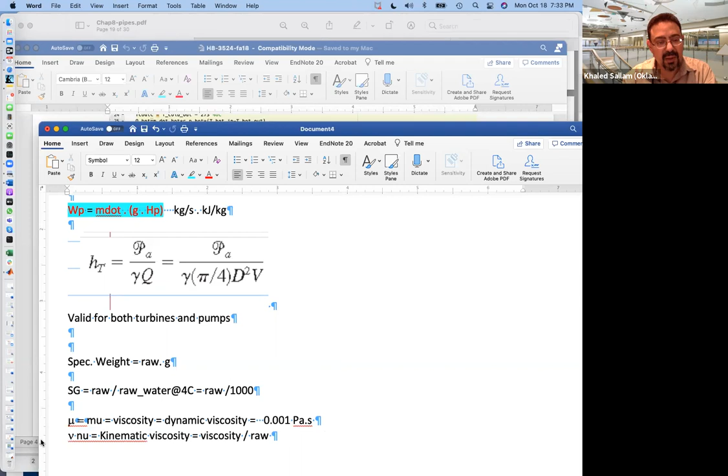And the kinematic viscosity, we give it the symbol nu, right? And of course, in Greek, here is a mu, right? So that is a mu. And the nu, I don't know where it is. Here it is, we got it. And probably this is too small for you to see. Let me make it bigger for you. All right. So the mu is the viscosity, and the nu is the kinematic viscosity, and it's viscosity over rho.

And for water, it's of order of 10 to the power -6. Why? Because you are dividing 10 to -3 over another 1,000, more or less. It makes them super easy to remember, because one of them is 10 to -3, the other one 10 to -6. And if you manage to remember this, then you would remember that nu of air is 10 to -5, because if water has already got 10 to -6, then air must take the other one. So kinematic viscosity of air is 10 to -5.

So whether it's water or air, the kinematic viscosity is really small. Water and air are not really that viscous. And that's why we have this concept of boundary layers. Only a very small region near the wall has the viscous effect. It's called the boundary layer, but outside it's almost inviscid. So water flow and air flow away from the wall is almost inviscid.

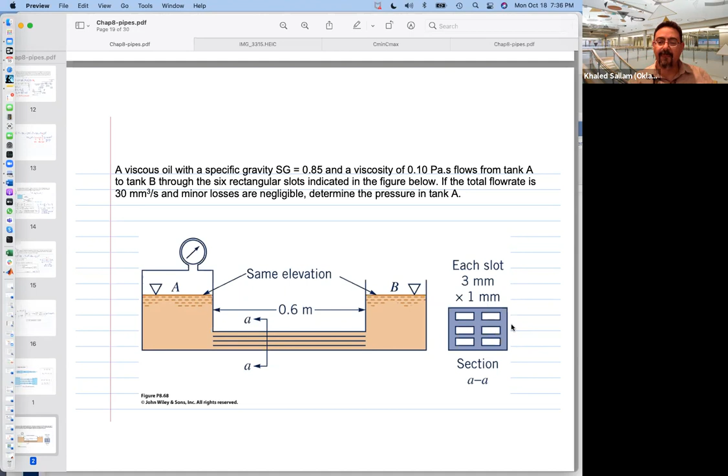So we have the viscosity and the density, and he had the flow rate and the cross-section area, and he said determine the pressure drop. So that's basically, let's use the formula. Delta P is FL over D half rho V squared. Except the only problem is, what's the problem now? It's not circular. I have to use this rectangular thing, and I have to use the hydraulic diameter. And F is not 64 over the Reynolds.

I have to go to that table and figure out, because it's probably going to be laminar, it's not going to be turbulent at that small diameter. I better figure out, where is it? Yeah. I need to figure out which one of those I should use. Is it 96, or 62, or 57, depending on A and B? What is the ratio between A and B? So 1/3, right? So it's going to be 0.33.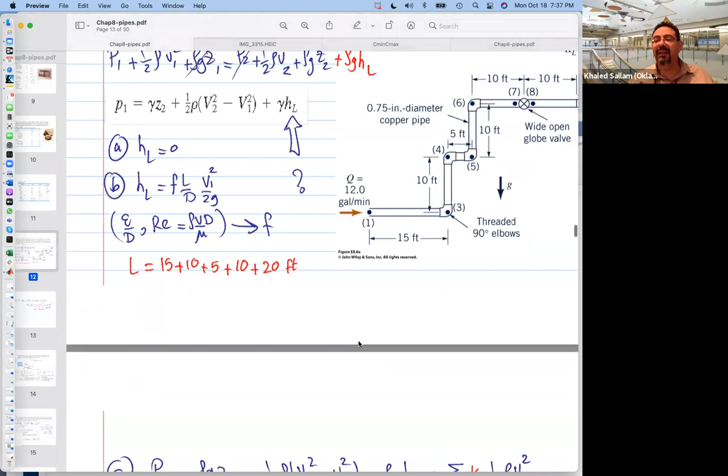But most real problems are turbulent flow. Yes, I stand with my earlier remark. Most problems are turbulent flow, except for like leakage flow and creeping flow. They call them creeping flow. The flow is so small, because it's just like oil going through a tiny space.

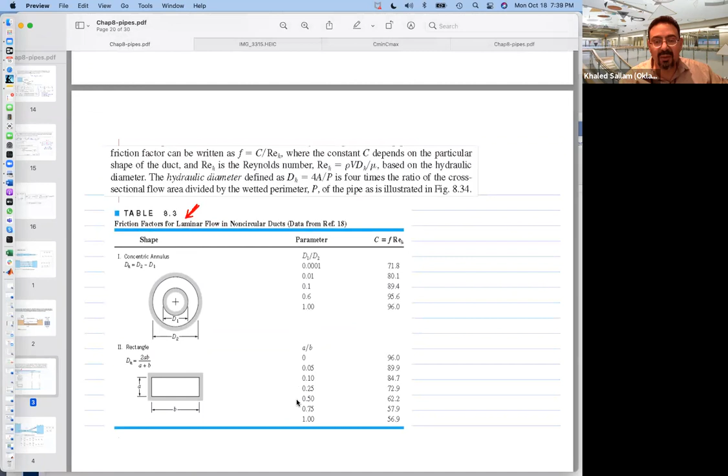So you're saying, well, let's use the table and figure out what's our hydraulic diameter. And you'd find the equation: delta P is half rho V squared multiplied by FL over D. You got your length, you got the hydraulic diameter, you'll be able to calculate the pressure here compared to this. Note that he's saying the same elevation, so Z1 will cancel with Z2. And if you say this is pressure 0, because you're using gauge pressure, then you're going to calculate P1 gauge. Question about this?

Good. Now this one, this is where you have not just parallel or series, but it starts to become a network of pipes, and it can get even more complicated, when you have multiple exits and multiple pipes. The way to solve those things is to nail them down to the elements. The elements here are the junction and the pipe. And what's the pipe equation? Delta P across that pipe is half rho V squared times FL over D. So there is a relation between the delta P across the pipe and the flow rate inside, meaning Q is AV.

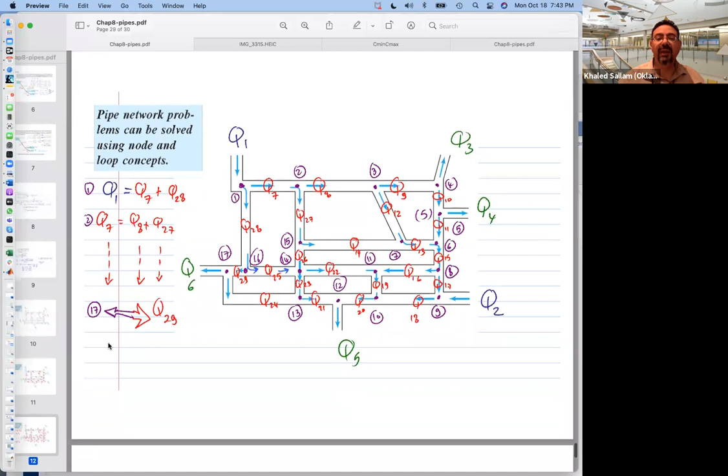You get something like this: all the Qs and all the pressures. And you will write this big matrix of all these equations together, and you solve them together. There are programs that actually just solve those networks of pipes. What is annoying mathematically is that Q squared. Had this been delta P and Q, it would have been a piece of cake. It would be a linear system of equations, and MATLAB can fly through them.

If you remember all the matrix inversion techniques, we can just invert it one time, get A inverse, and then you have a relation between delta P and Q. You change the Q, you get the delta P just by multiplying by A inverse. But what's annoying is that Q squared. So what do a lot of software do? Linearize this equation. They say this Q squared can be like two Qs, Q multiplied by another Q.

And the first Q comes from our initial guess or previous iteration, so they assume a Q. Now there's only one unknown Q in every equation. All those Qs in the big matrix divide into two parts: the Q known, or assumed, and the Q that you're solving for. So now you can fly through them, get the solution, and go one more time, and one more time. Every time, you update the Q that you are assuming and solve for the other one, until what you assume is what you get. Okay? Make sense?

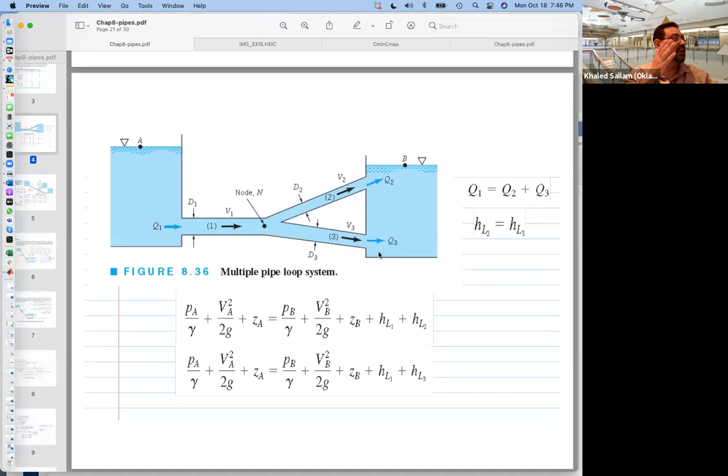I know you're probably worried about the hydrostatic pressure, but you shouldn't be. Let's think of it as a horizontal problem, like we are going into the first floor, or a ceiling network of sprinklers. So you are delivering at the same location, so that pressure will be that pressure. That's why he said HL2 is the same as HL3. Why? Because they start from this node and finish at the same location. Think of it horizontally for now, like looking from the ceiling to the floor plan. They open to the same tank, therefore the same pressure.

Okay. So he is telling you to calculate, say, the flow rate and the pressure in the middle, for example. Say this head here is 10 meters and this one is 4 meters. So how will it go? You can see how he's writing the Bernoulli equation along this branch and then along this branch.

So when you go from here to here, you have the pressure over here, the velocity over here, which is 0, plus the elevation, equal to the pressure here, plus the velocity, plus the elevation, plus that head loss, plus this head loss. Those are the losses, and that's why you put them at the outlet side. And going along this branch, the energy lost is over what? The energy at 1 plus the energy at 3.

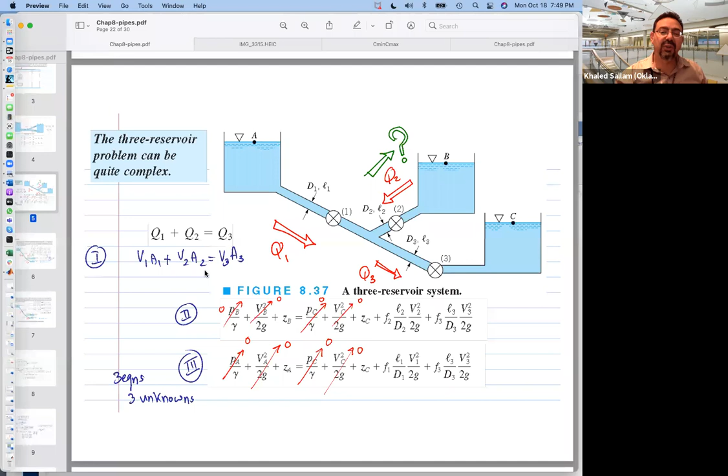So the point is there are 3 velocities that we need to solve for between this and this. Yes. And so 3 unknowns cannot be addressed with 2 equations. That's why you need a third equation. So the third equation comes from the node. That node says that this Q equals this Q plus this Q. Right? And so now you finish basically the system. So 3 equations and 3 unknowns.

So what we did here, knowing the static pressure here, static pressure here, static pressure here, and having the node equation, this is similar to the pipe and the pipe and the pipe equation. Each one of those pipe equations is basically saying my flow rate or my head loss is due to the pressure difference from this place to that place. Except that he did this and he did this.

So what we did here on a small pipe, they can easily do in a big network. It's the same concept, same set of equations. Right? So this part, whether the flow rate is going to go this way or that way, you don't really know at the beginning. Same thing over here. You should ask yourself, does the flow really go this way or will the flow go that way? Depending on those values at the boundary.

So what should we do? We should assume the flow and let the equation get the velocity for us. And if we are right, it will work. And if it's not right, we know that it was wrong and let's go the other way.

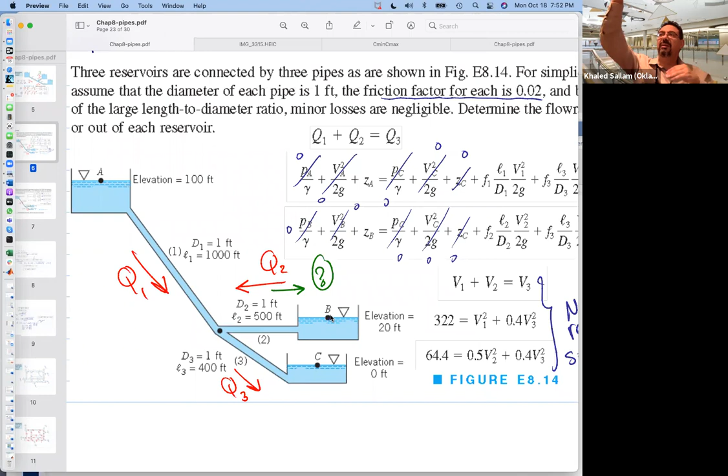So what is required? Determine the flow rate into or out of each reservoir. The unknowns are Q1, Q2, and Q3. Okay. So same node equation as before. This Q plus this Q. Why plus this Q? This is just the assumption. Right now we are saying Q1 plus Q2, but in case this didn't work, we will flip it, make Q2 go the other way, and solve for it in this other configuration. So you make the best guess that it's probably coming in.

And so then the equation becomes like this. So this plus this equals this, okay? And if this is now the new direction, you can see that the equation from B to C has pressure drop on 2 plus pressure drop on 3. And the other equation from A to C has pressure drop here plus pressure drop here. Had this been done this way, we would have written the equations like this. If Q2 was going into the reservoir, the pressure drop from A to B would be this pressure drop plus this pressure drop.

And what's the pressure drop? fL over D times V squared over 2g. Note that he's writing this Bernoulli equation in terms of head. So when you're writing it, this is P over rho g, V squared over 2g, and Z. We can also write the Bernoulli equation in terms of pressure.

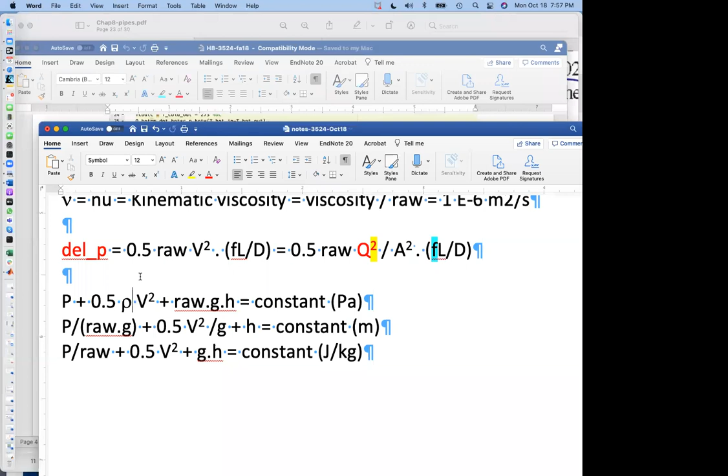Joule per kilogram. Why joule per kilogram? Power was m dot gh. GH is joule per kilogram. The head multiplied by G is the energy per unit mass. Because 0.5 V square, what does it remind you of? Kinetic energy per unit mass. Kinetic energy is half mv square. So half v square is not joule, it's joule per kilogram.

So yes, v square is meter square per second square, but it's also joule per kilogram. So everything here is energy per unit mass. So Bernoulli equation can be written in terms of pressure, in terms of head, that's really nice for when we do pumps, but it also can be written in terms of joule per kilogram. I see potential energy per unit mass: mgh, m is missing, so joule per kilogram.

I see half v square, that's kinetic energy per unit mass, and I see p over rho, which is the flow work, the one that we add to the u to have the enthalpy. H was u plus p over rho. So p over rho has to have the units of enthalpy and of internal energy, right? H was U, the internal energy, plus P over rho, and the unit was joule per kilogram.

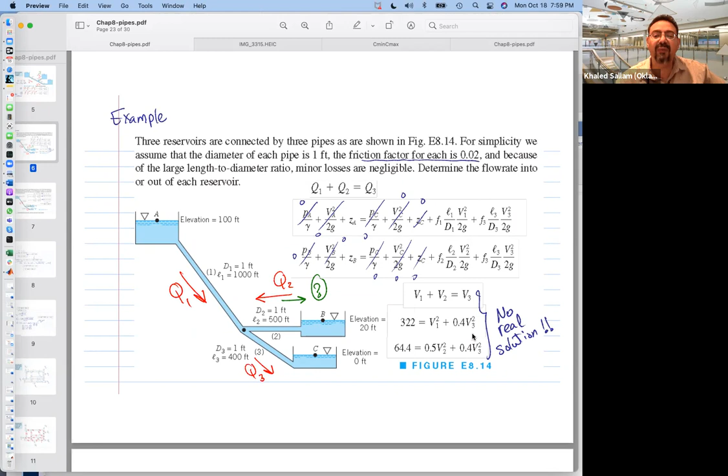So H is U plus P over rho, joule per kilogram. Okay, good. So they are writing it here in terms of meter, and that's why everything is a meter. So don't write the pressure loss here as FL over D half rho V square. No, you have to write FL over D V square over 2G. So between those three, it's three equations in three unknowns, V1, V2, and V3, and he's pulling them together to get the V.

And notice that all those F are assumed. You cannot really get the F without knowing the V. So you have to assume an F, get the V, check, and iterate until the F you are using matches the velocity you are calculating. He turned three equations, three unknowns into one equation and one unknown, which is V2, and solved it. I'm showing you the steps.

He basically has a fourth order, which is second order in V2 squared. He solved it and figured out the solution. So that's V2, and then he got Q1, Q2 and Q3. If he didn't get a real solution, he would say Q2 must have been wrong and go back. Make sense?

Okay, so before you do your quiz, one comment. Let's go solve the previous quiz. I posted the solution for it here. Let's just visit it before we do today's quiz. Quiz 7 solution.

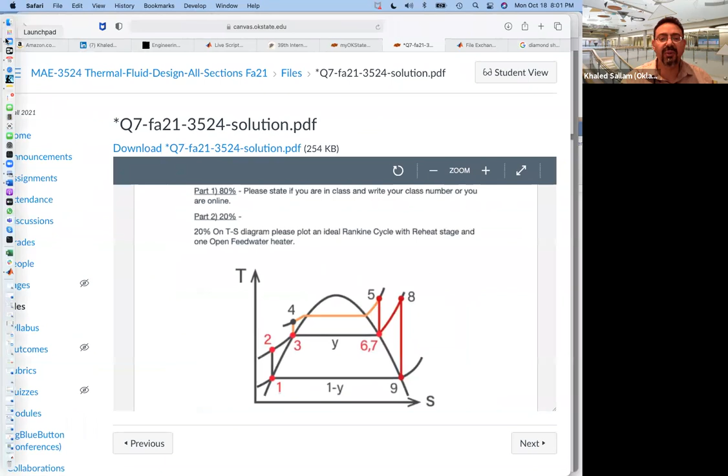What was quiz 7? It said plot a Rankine cycle with reheat and open feed water heater. The problem I saw in this, there were only two people whose solution I actually liked. Bibin graded all of it, but I had a chance to look at all of them. I said quiz 6, but it was really quiz 7. And what I saw was wrong was, by the way, this is not the only solution.

See what he's doing? He's doing the reheat pressure the same as the feed water heater pressure. That's okay, but not necessarily. We can do the reheat like this. By the way, we know what the optimum reheat pressure is, right? For the reheat pressure to be optimum, it should be like 0.75 of this.

And what's the optimum feed water heater pressure? If you are the one selecting the feed water heater pressure, where do you put it? Up here or down there? No, that is the reheat pressure. But the feed water heater, the steam that we are pulling to heat our water from 2 to 3, where should we put this ideally? 0.5, yeah, in the middle. In the middle of what? In the middle of the top and bottom pressure.

You come to the TS diagram and you basically set them in the middle. Is it really the ideal? No, but it's a very good start. Then you iterate on the cycle. So what do people do wrong? The pressure line. I still saw people come here and keep going. The pressure line, once you leave the dome, what happens? You go up. All those are constant pressure, right?

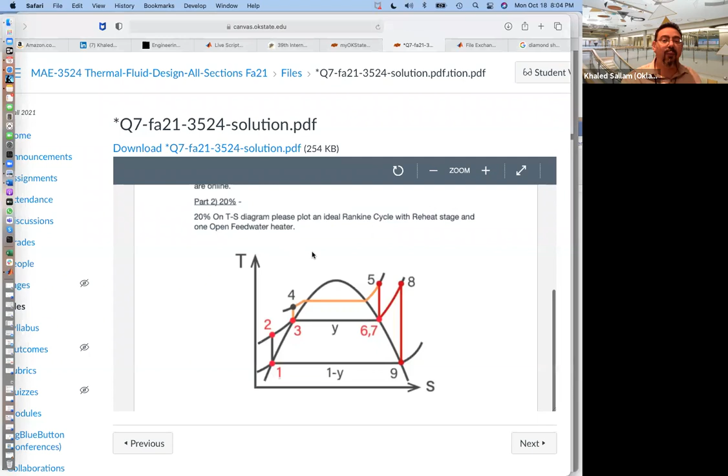And also, when I say ideal Rankine cycle, what does ideal mean? No losses. Isentropic expansion. So when I say ideal cycle, you don't plot it like this. You need to go straight down. Isentropic. Okay. Because I think this is really important, and maybe it will show up in the final, let's have one more quiz on this.

If you go to assignments, quiz 8, which is today, and download this, it will tell you: sketch the power plant corresponding to the attached TS diagram. So here is your TS diagram, and I want you to sketch the boiler, the turbine. How many turbines? 2 turbines. And how many feed water heaters? 2. I'm not going to say whether they're open or closed. You have to look at this figure and see which one is open and which one is closed, and put the numbers. Right?